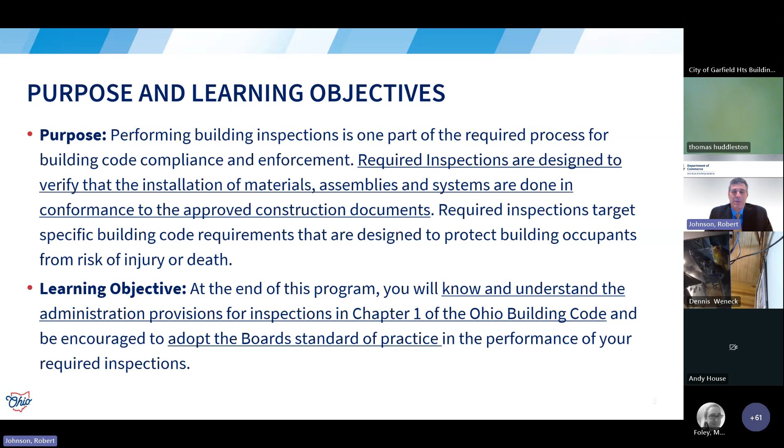So, as a quick introduction, we talked about this yesterday, but it is worth repeating. What we want to do is understand building code enforcement concepts and what it is. The intent or the purpose of the code, as established in OBC Chapter 1, is to establish uniform minimum requirements related to the conservation of energy and safety and sanitation of buildings for their intended use and occupancy, with consideration for performance, meaning establishing requirements in terms of performance objectives of things that are designed into buildings, to the extent of use, meaning the use of materials, technical methods, devices, etc.

And the building code really does strive to recognize that cost does have an effect on safety at times. So the International Code Council and all the development that they do of the codes has really got that always in mind. Of course, the main objective is to ensure safety of occupants in buildings. No matter how big, how complex they may be, they need to be safe for an occupant to be able to exit buildings, to be safe in buildings, to be able to operate in buildings safely.

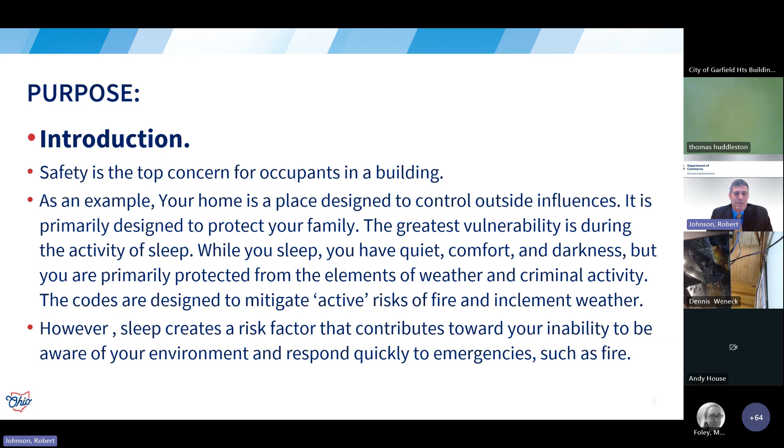The codes are designed, though, to mitigate these active risks of fire and inclement weather. So even though sleep creates a risk factor, we want to make sure that the buildings that we're in, especially our homes, are designed in such a way as to mitigate the greatest risk, and that is fire. If we do not have things built into our residential structures, we could suffer as a result of something that didn't go right with the system in the house or an electrical fire or things like that. So as you can see, safety is always our top concern. Whenever we go from the outside to the inside of the structure, risks increase. So let's move on from that and let's talk about some of the strategic objectives of the board and the things that we promote.

Of course, building codes mitigate risks and hazards of all types, and even for people and how they gather in buildings. We promote consistent and uniform code enforcement in the state of Ohio, and that's really one of my primary objectives in my position with the board, is to establish uniformity and consistency of building code enforcement through the state.

So that if I go to get an approval from, let's say, East Cleveland, and then I go to Cincinnati, and I go to Central Ohio, Columbus, I should be experiencing a consistently similar process to attain building code compliance with the design that I've submitted.

Of course, everyone's different, personalities are different, structures and buildings that these building departments reside in, their capacity to handle various levels of projects, all those things factor into how constituents experience how building code enforcement is done.

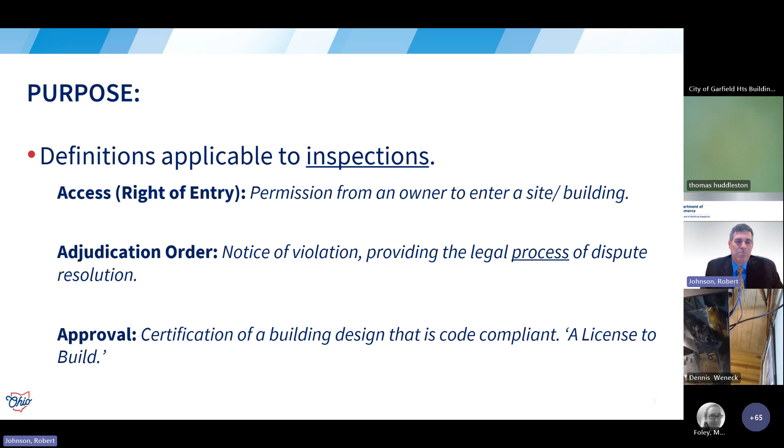An approval is a certification of a building design that is code compliant. And the Ohio Revised Code, of course, calls it a license to build. Some other definitions. Compliance: it's a design and construction that comply with the Ohio Revised Code sections that regulate or give the board authority to regulate the building codes.

An inspection is a verification that construction matches the approved construction documents. Violation is a notification that the construction does not match the standard of the approved construction documents. So as you can see, this language is designed to ensure clarity when we're doing enforcement.

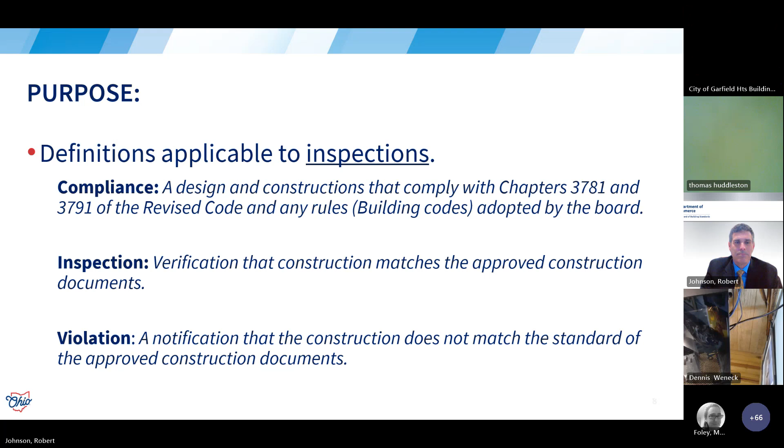Okay, so again, this is reiterated from yesterday, but the scoping of the building code is such that structures are to be determined to comply with the building code. In other words, to become safe. So no plan shall be approved or inspection approval given unless the building represented by those plans would, if constructed according to those plans, comply with the Ohio Revised Code and the rules of the board, which is the actual building code. An owner may exceed the requirements of the Ohio Building Code.

So what that means is that if, let's say you want to build a house and you want to take the extra step to really provide a higher degree of protection for you and your family, so you ask the builder to put in a fire protection system, sprinkler system. There's no problem doing that. You're actually exceeding the requirements of the Residential Code of Ohio by incorporating that system into the design.

However, it still has to be submitted with the design. It still has to be determined to be in compliance with the code, and it has to be installed in compliance with the approved construction documents. Even though it's not required as a system in this type of building, it is still required to be approved and inspected, and that is part of the certificate of occupancy.

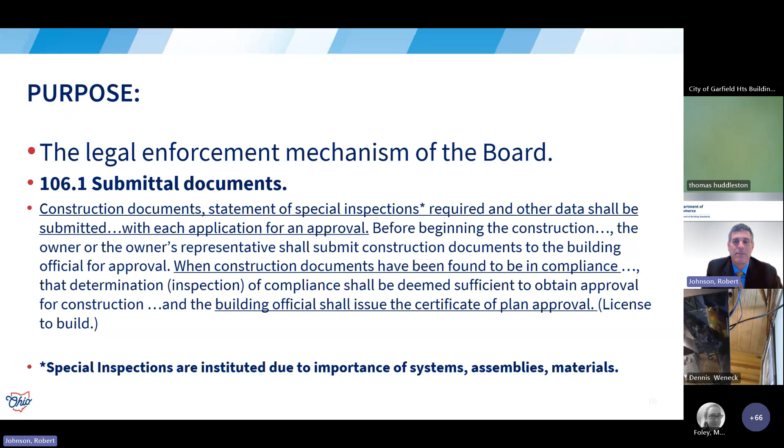One point about the special inspections is that it is instituted due to the importance of the systems, assemblies, and materials being used. So when you look in Chapter 17, you see the types of things that are required as a special inspection. Then you begin to understand that that's more than just scoping of the project. It's about the importance level of the types of things that are being inspected in Chapter 17. Alternative engineered design.

Just a heads up, in the near future, we're going to issue a memo, a BBS memo, on alternative engineered design. It appears to be something that is not clearly understood out in the general public. And we just wanted to clarify what it actually is, what it covers, how it's used, how it's enforced, how it's determined to comply. So when we look at 106.5, it's called alternative engineered design.

So the design documentation, including the inspection and testing of an approved alternative engineered design, shall comply with the requirements in 106. So design criteria, meaning it's design that shall conform to the intent of the building code and shall provide an equivalent level of quality, strength, effectiveness, fire resistance, durability, and safety. Materials, equipment, or components shall be designed and installed in accordance with the manufacturer's installation instructions.

So just so we all understand, when products are put into buildings, that includes materials, and it also affects methods of construction, the majority of these things have already been vetted. They've already been tested. They've already been approved. They have reports associated with them from conformity assessment bodies.

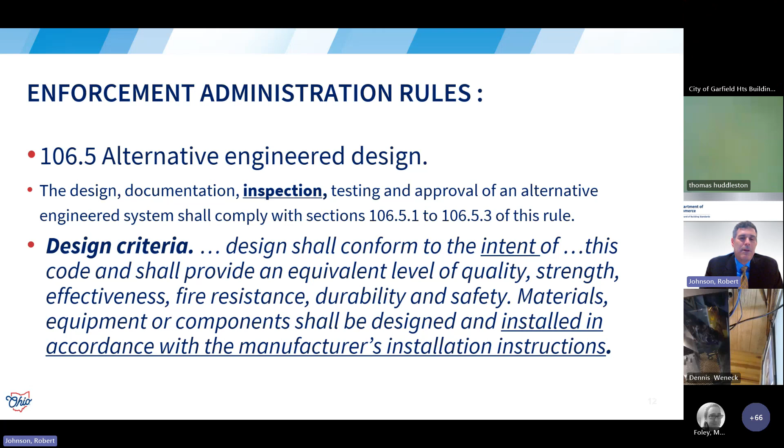And the engineer has to basically prove to the building official that this new thing is meeting the intent of the building code, and they've been able to do to the best of their ability, and perhaps even with help from testing laboratories and things like that, to establish that what they've designed is approvable and can be integrated into a building. So a good example of this is actually a very old example.

Between 1936 and 1943, the great Frank Lloyd Wright, perhaps considered America's architect, had performed an alternative engineered design on a building that was amazing. And it's still there and it's still amazing. What he did was create an alternative engineered design. And this design uniquely is addressing structural systems. He had a couple of engineers that always thought outside of the box, and that's why Frank Lloyd Wright's buildings are extraordinary. But I think the main thing here we want to consider is how they went about doing it.

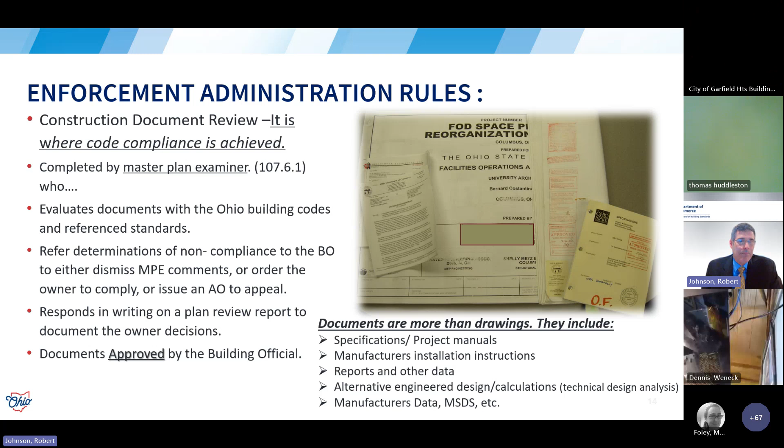There also is a certificate of plan approval. This is part of that packet. This certificate essentially establishes the criteria that the building design represents and any other outside information such as variances and stipulations, certain conditions of the approval. Also remember that a list of required inspections, if required, for the project would be included in this package. And the building official is going to give an on-site inspection record to the owner with the certificate of plan approval.

I just want to caution you as inspectors, when you're called to come out to do an inspection at a site, you need to make sure that this information is on the site. If any of these things is missing, you should tell the owner or tell the contractor that this information is required and that you cannot perform the inspection until you have that information.

Now, if your building department has iPads and things like that that you use as part of your service, a lot of departments now are preloading the construction documents for the projects so that when you show up to the site, you already have them on the iPad and you can refer to them as you do the inspection. And that's becoming more of a thing now that we've entered the digital age and more things are being submitted to the building department electronically. There may not be physical drawings anymore with regards to doing your job. So just a heads up on that. If you're not tech savvy, you want to keep working on that.

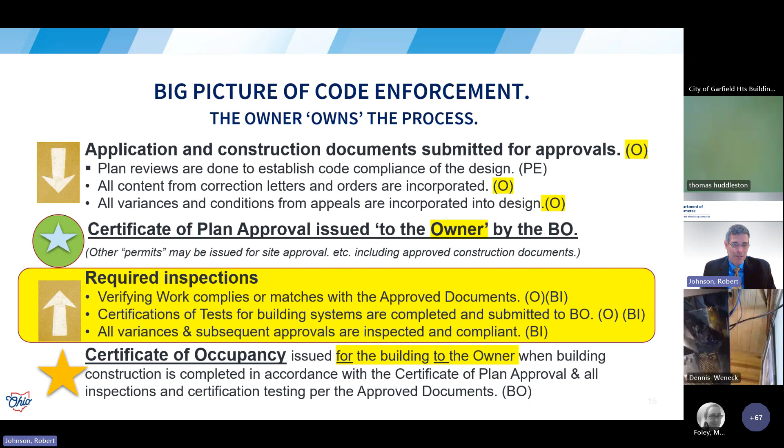And just one other dynamic is that you can have multiple inspectors doing inspections and re-inspections, and we'll talk a little bit more about that interchange later. Okay, so let's talk a little bit about personnel responsibilities. We did talk about these things yesterday. I'm going to just kind of fly over this information, but we're going to focus on a couple other things with regards to liability and also violation of duties.

Okay, so as we said yesterday, this section has now essentially been vacated out of Chapter 1 of the 2024 Ohio Building Code, and all this information now has gone into the Ohio Administrative Code as basically duties and responsibilities. So an inspector is responsible for determining that work is performed in compliance with the approved documents. You're going to hear me say this all day, okay? It is your job to verify that work matches those documents. And remember, we're talking about the approved documents.

When you're out on the job site, there's going to be a bunch of copies of the documents. They may not be the approved documents. They could be construction drawings that the contractor has specifically for the scope of his work. He may have a bid set out there. He could have a permitted set that hasn't been stamped and approved by the building department. It's just a copy from the designer.

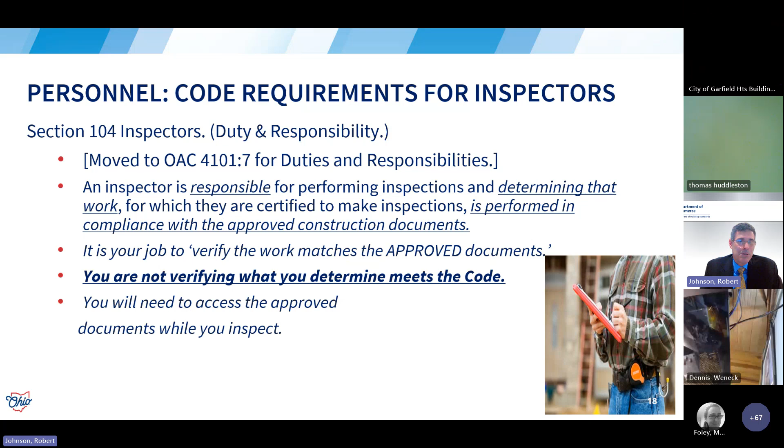You want to make sure that you're always working from the approved set, the one version that the building official has stamped and approved. That is the one that we're enforcing. You are not also verifying what you determine meets the code. You are looking at the documents and you are checking for that exactness between the construction and the documents. And you will need to access the approved documents while you inspect.

Also, all inspectors shall inspect the work to the extent of the approval for which the inspection was requested. So if you're out there for a framing inspection, then you're going to do just the extent of that inspection. You're not going to go back and look at the foundation or other things that have already been inspected and approved, meaning verified to comply with the approved building documents.

So like I said, with phased approvals, it does get a little tricky. You need to know the extent of the scope of the type of approval that it is. It could be a nonconformance approval, which, sorry about that, I should have struck that. We no longer have a nonconformance approval in Chapter 1. We just have conditional, phased, and annual. So the ones that remain, they do have limitations.

Conditional: the contractor may have a conditional approval and he started work on the footings and foundations and the undergrounds, but he can't proceed past that until he's already submitted, meaning the designer submitted the balance of the construction documents for review and approval. If they are phased approvals, you're just going to do that phase.

If you're out there to do inspections of, let's say, the start of it, the footings, foundations, the slab on grade floor, any undergrounds, including building system equipment. It could be underground ductwork, things of that nature. Those are the things you're going to be looking at.

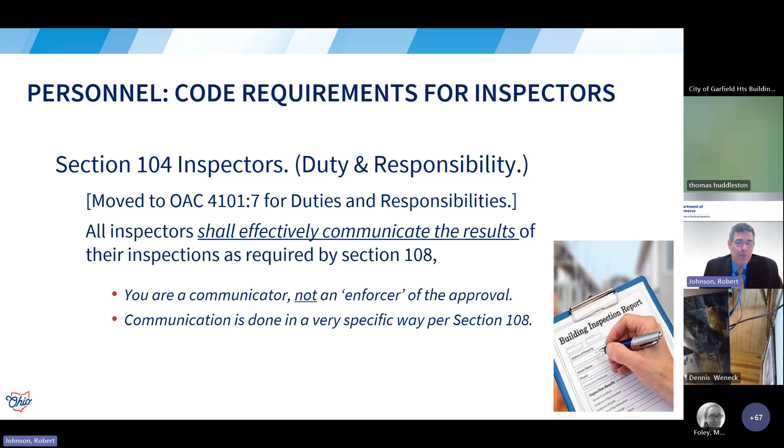Duties and responsibilities have also been moved over to 4101:7. And the key here, though, is that it says in there that all inspectors shall effectively communicate the results of their inspections. Remember, you are a communicator. You're not an enforcer in the strictest sense of the approval. That's actually the building official. Communication is done in a very specific way per section 108. So when we get there, we'll talk about those specifics.

We also talked about this yesterday, that inspectors are to conduct themselves in a professional, courteous, impartial, responsive, and cooperative manner. Remember, you're not just representing yourself, you're representing your political subdivision. You're also, in a way, representing the Board of Building Standards in the state of Ohio. Conduct means to cause oneself to act or behave in a controlled manner. Okay? That's conduct. And then have a reputation of good character and perform your duty being above reproach. Okay?

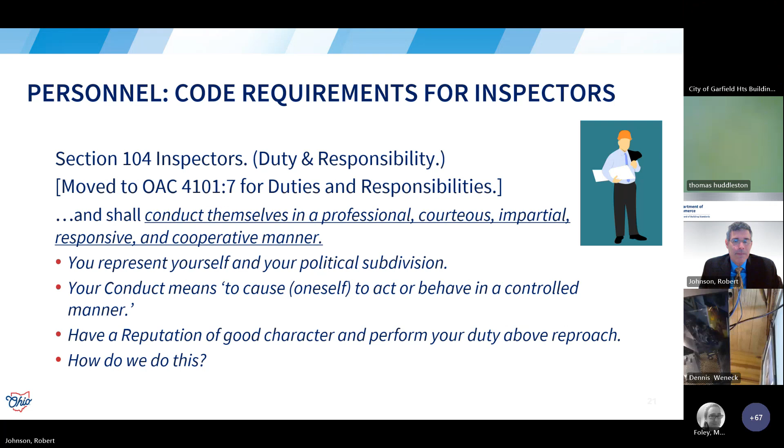You want to make sure that you're doing things the right way. And you want to make sure that no one could ever say anything against you because of how you have been performing your duty. So, how do we do this? Well, I think it goes back to this issue of conducting ourselves in a certain way. So I'm going to define it a little bit more. Your duty, no matter your assigned responsibility in your certified position, is to conduct yourself in a manner that is, and the first word is professional. Professional means to be businesslike, competent, knowledgeable. That's what a professional is.

Courteous means to be very polite, respectful, and deferring. Deferring is a hard one because we want to just kind of take charge of things, but we also want to respect and really defer the conversation to the people we're talking with so that they can be heard. That's courtesy, being polite and doing that. Impartial means to not be biased, and it means to be fair and equal in your treatment of either people or even construction.

But the key here is that when we have a bias about something, let's say we've done something as a contractor before we entered this business of enforcement, that we've always done it this way when we constructed this or that on a project. And then we come along as an inspector and we see that this contractor is doing it a different way. And we feel like we need to tell them that the way they're doing it is the wrong way, when it may not be the wrong way. The end result may still be the same. So that's why we want to be careful to not be biased in our approach.

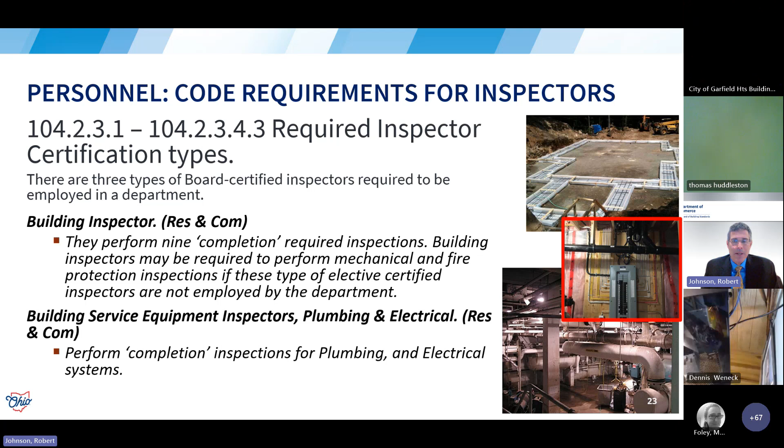But we do want you to know that if you are an electrical inspector or a plumbing inspector and you have no other types of certifications, you should not be dispatched or asked to do other certified inspector duties and responsibilities. Okay, so let's all stay in our lane based on our certifications.

Okay, there are two other classes. There's elective inspectors, and these are ones that are basically kind of outside our purview. Medical gas is board certified inspectors that may be employed by the department, but they have a certification through the state of Ohio. Other inspectors on a project not certified by the board may be involved as part of the project inspection team. So these other inspectors are not your team, but they are still on the team for the building.

So if you have boilers, elevators, or if you're having special inspections done, DIC, the Division of Industrial Compliance, does the elevators and the boilers. Special inspections could come from the design professional of record on the project, or they could be people who come from a business that is a recognized conformity assessment body with the board.

Coordination is key. All inspectors are required to coordinate their efforts with other inspections to verify that the work is completed. This should be obvious, but inspections must be completed in order. So we expect, of course, the footings and foundations to be done first. And when it's approved, then you can build upon it with framing. And while the framing is being done, they can also start building the electrical and the plumbing systems into the framing.

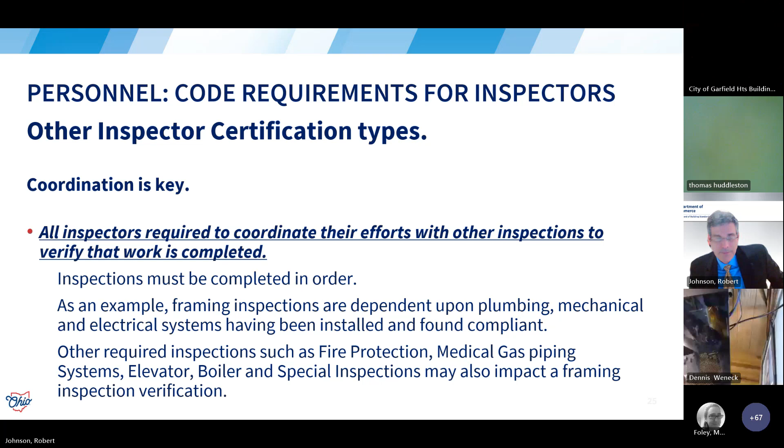Okay, let's talk about liability. First off, I got to tell you, the only reason why I'm bringing this up is because it's mentioned in the code, but we are not lawyers. We are not your prosecutor or your law director. But we do want to provide a little bit of understanding on this topic. If you have specific questions with regards to liability, you have to talk to the folks at the jurisdiction that you work at.

Okay. So let's talk about it though in terms of describing this issue from the standpoint of the Ohio Revised Code, because this is really where this originates. Liability of certified building department personnel for any tortious act will be determined by Ohio courts according to the applicable provisions in the Ohio Revised Code. So a couple words in there we need to define. Liability means being made responsible to pay for offenses to someone harmed. And then tort is an action that wrongly causes harm to someone, but that is not a crime and that is dealt with in a civil court. Okay.

Liability of certified building department personnel. To be protected, it says the employee's action or failure to act that gave rise to the cause of action under the tort law had to be within the discretion of the employee with respect to policymaking, planning, or enforcement powers before the protection of the statute can be invoked, unless one of the following exists.

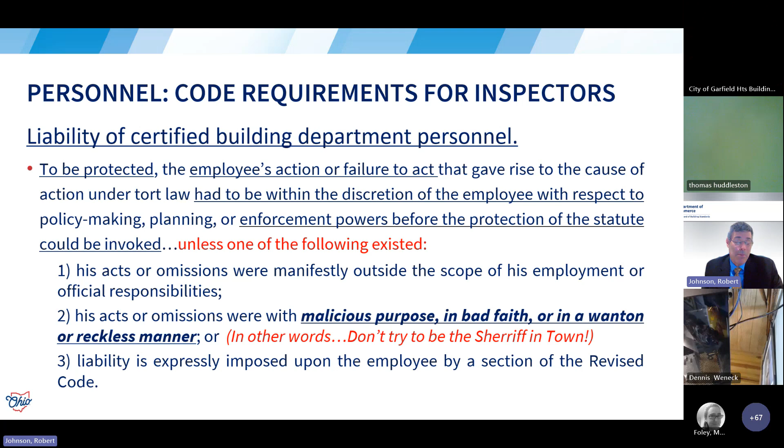I mean, you're covered, but what it's going to mean is this. If the employee is sued, the political subdivision has a responsibility to defend you if you prevail in the action. If the employee acts within the scope of his or her job duties, the employee has the protection and is unlikely to be successfully sued. So the liability coverage doesn't mean you won't be sued, okay? It just means that if you prevail in the case, the subdivision will basically pay for all your expenses. Okay? If you lose, guess who pays? I think you know the answer.

Remember this, the board or their staff do not provide legal advice on these matters. Okay, I'm just telling you that the code mentions liability. How it's executed at the local level, you need to talk to them about it. It's highly recommended that you contact the political subdivision's legal counsel, such as the law director or prosecutor, for guidance with these issues. Okay, next one.

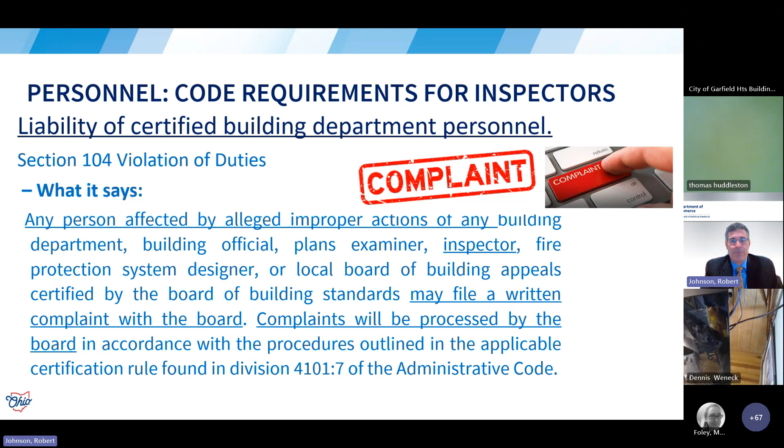So, but when we get complaints, we take them seriously, and we always wind up calling the building official to get additional information. We know there's two sides of the story. We get that. We don't take sides. We try to remain as unbiased as possible when we hear complaints from constituents. We are advocates for you, but we're also advocates for the constituents in Ohio. They should be being served well. So I just wanted to mention that violation of duties is an issue. All right, so let's move on to the next thing.

These are the types of complaints that we generally receive. Sometimes there's gross negligence in the performance of the duties of the inspector. Sometimes there's incompetence. Maybe they just don't understand. They've been assigned to do a certain type of inspection and they've never done it before. Incompetence doesn't necessarily mean that they're stupid. It just means that they're not informed enough or they haven't learned enough about a particular area about buildings. And yet their certification requires them to do those inspections.

My recommendation is you should always have a learning mind. If you show up at a job site, inspector, and you're confronted with something you've never seen before, call your buddy who has been doing this for 30 years and ask them about it. Say, hey, help me understand what's going on here. I'm looking at the construction documents. It looks like it's correct, but when they performed the test, this happened. So always be learning. And if you have questions about something after you perform an inspection, at the end of the day, go back and look at the code book and learn a little bit more about it.

Okay. But here's again, if someone is doing things in an incompetent way, that's a legitimate reason to hear the complaint. We just need to find out what's going on. And also misconduct in the performance of duties. Let's say you got your way of doing things, and that way isn't really matching up with what the board's way is. We'll find out about it eventually.

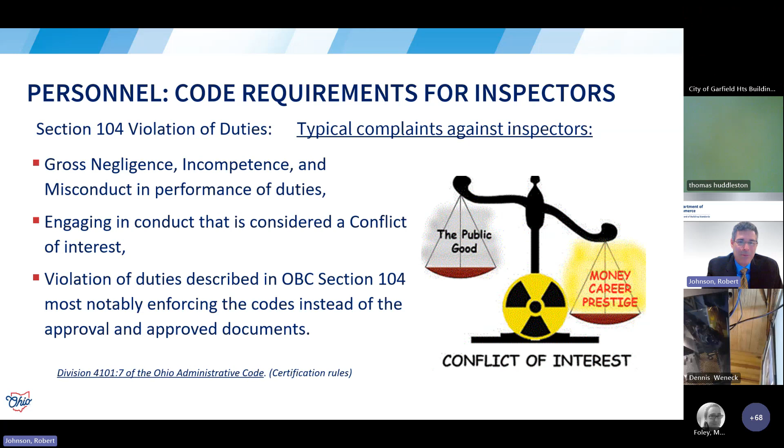So what it means, you are accountable to many entities regarding your duties and responsibilities, not just to the board, but to the building official who's the one responsible for administrating the whole building department. Also to your elected officials, because they're the ones who own the certification of the building department. It's not the building official, it's the elected officials. However, if violations to the board's rules occur, you could be disciplined or decertified or suspended or maybe put on probationary status if what the complaint said was true. That's when we work with the certified individual to correct things that they're doing incorrectly.

All right, now let's talk about the inspection program.

See how we doing? Okay, 9:30.

All right, so we're going to talk about the process of inspections. So after those documents are approved, construction or work may proceed.

Now that's in accordance with the Ohio Revised Code. So we talked about the difference between approvals and permits yesterday. Permits are local instruments for perhaps all types of approvals for a building and its site. So we understand that. The certificate of plan approval basically has one specific purpose, and that is to say that this design complies with the building code. Therefore, if you choose to build it, it will be a safe building.

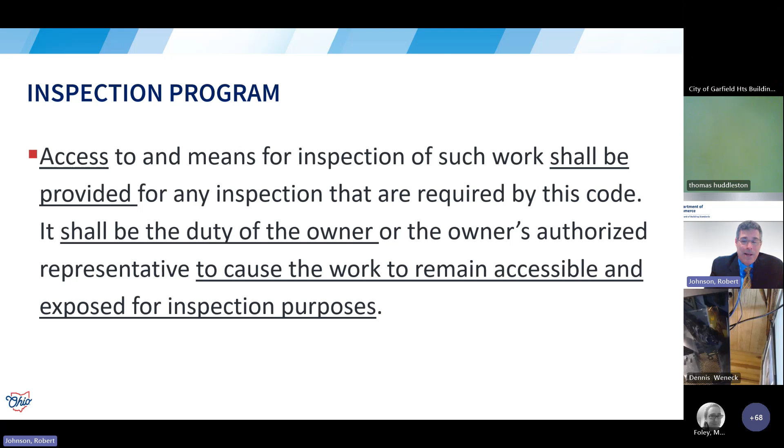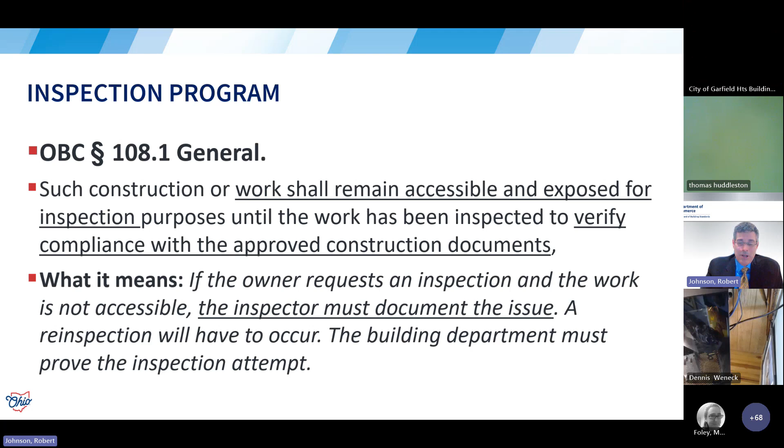All right. Work shall remain accessible and exposed to verify compliance. What it means is that the inspector must document the issue. If they can't get to the work, you still have a responsibility to document that in the inspection record, and you can indicate that work could not be completed and that reinspection would need to be called for once those materials have been moved away from the construction. You do have that right to do that.

Okay, this is with regards to how long after someone calls for an inspection does the inspection have to occur. The section says that within 4 days of when it's called. So remember, the contractors are on a deadline. Contractors are pushing the work, and they will most likely document when they called you, meaning the building department. If they know this section of the code, they know that if you don't show up in 4 days to the minute, they will start working on the next phase because they have the right to do that.

This is why we have to be prompt. We need to be on time. We need to be within the limitation of when to do the inspection. You may be slammed right now and are having trouble getting all the inspections in. It's up to the building official to ensure that everything is getting covered and that everything is being reviewed in terms of the projects. He or she is responsible to track and audit all the projects in the queue. Okay. So the bottom line is that the department is required to manage timely inspections.

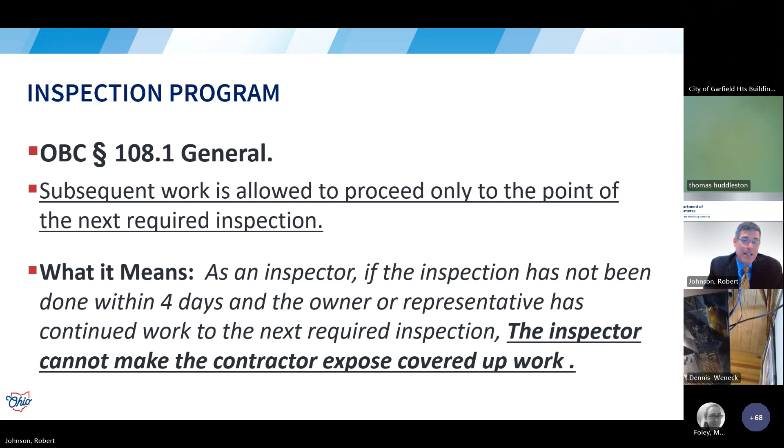Subsequent work is allowed to proceed only to the point of the next required inspection if you've gone beyond 4 days. So in other words, if the contractor covers up the wall and the electrical, plumbing, and framing hasn't been inspected, but they were all called for and no one showed up, the contractor does not have to take down the drywall. I don't know how you're going to do it. You can look from underneath if there's a basement. You can look from above. You can look at angles, but you can't tell them to take off the drywall.

Required inspections. Okay, so we talked about the importance of having an accurate listing of required inspections on every given project based on the scope of the project and perhaps even the phases if there are phases. Generally speaking, we say that a boilerplate inspection list isn't acceptable only because they usually just get reused. And maybe a third of those inspections won't be applicable to the project that is to be inspected. So we want to make sure that a list of all required inspections for each project is accurate. Okay.

The building official shall cause inspections to be set forth in the inspection list by the appropriately certified inspector in accordance with the approved documents. So we talked about this earlier. If you are just an electrical inspector, and I'm not saying just, because you know a lot, but electrical inspectors, if for some reason a building official or a clerk assigns you to do something that you are not certified to do, just go back and tell them you can't do it because of the certification.

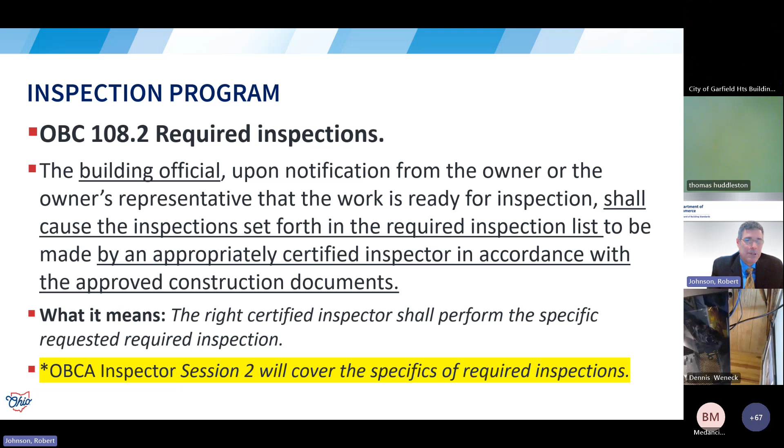Okay, we want to make sure that everyone is properly assigned based on their expertise to do the inspections they're supposed to do. Okay. Session 2 will talk about the specifics of required inspections. So right of entry, this one is really quite simple.

Basically, we're trying to, again, strike the line on the difference between lawful entry into a building or a premises versus trespassing. If you're trespassing, usually the police are involved and people are really upset. So let's just make sure that we know where the line is. The building official or their designee, the inspector, is authorized to enter the structure. Okay, so you're already authorized to do so. Building code says that this is your responsibility to enter those structures, but you're supposed to do it at reasonable times.

And I would also add to that, or within the policy of the building department. You may have a policy that your inspections start at 7 a.m. and you're trying to accommodate contractors because they like to get these things done in the morning so they can have a full day of work ahead of them. Or it could be the individual homeowner that starts work really early and isn't home till 5 o'clock, but he will be happy to have you come at 6 o'clock to do the inspection. So whatever your policy is, that's what you want to adhere to.

But here's the thing, when you show up, you need to show your credentials, meaning who you represent, the building department, the jurisdiction, and that you ask to come in, as in, may I come into the structure to perform an inspection? Be that disciplined about it. You're telling them what you want to do, and that you want to go in and look at the work. And then make sure that they say yes, and that's the easy answer. Yes, you may come in. You want to hear that because it'll be your word against theirs if there's any disagreement about it later.

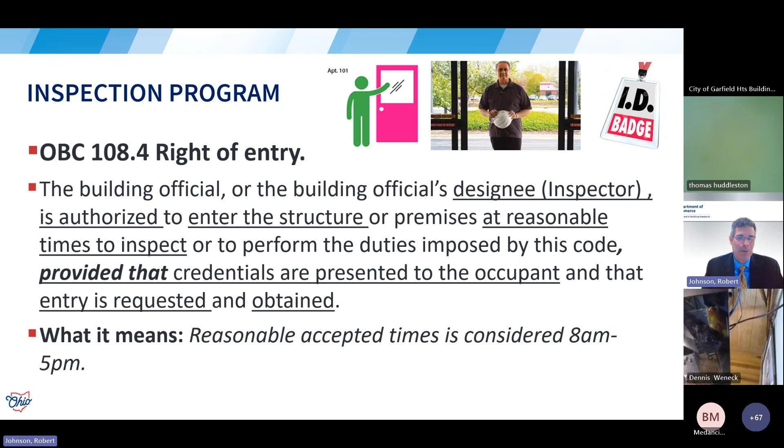Okay. Right of entry, under normal circumstances with inspections, is usually not an issue. It could be as simple as just going to the job trailer and saying, "Hey, I'm here. Let's take a look at the documents and talk about what we're going to look at today before we go walk the job." You already have been given right of entry to enter the site, and you've already been acknowledged by the site superintendent. So there's not really a formality per se of right of entry on a job site.

But when it's an occupied building already, that's different. You need to make sure you're checking in at the front desk or checking in with the owner at the door of the house or at the apartment. So anyway, all that to say is I think you get it. Let's just make sure that we're always doing the right thing.

Okay, so there's times though where someone reports a serious hazard. So where permission to enter has been denied, someone doesn't want you to come in to see something, or the building official has probable cause to believe that there exists in that structure a serious hazard, it says that the building official can proceed under Section 109 for remedies or recourse provided by law to secure entry, meaning an administrative search warrant from the prosecutor or the law director.

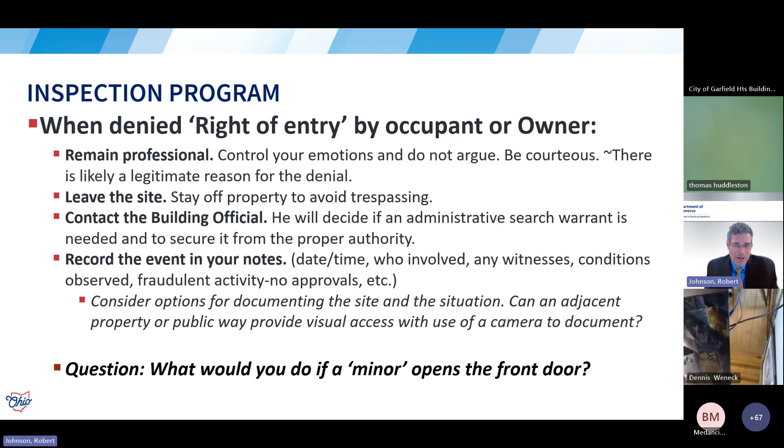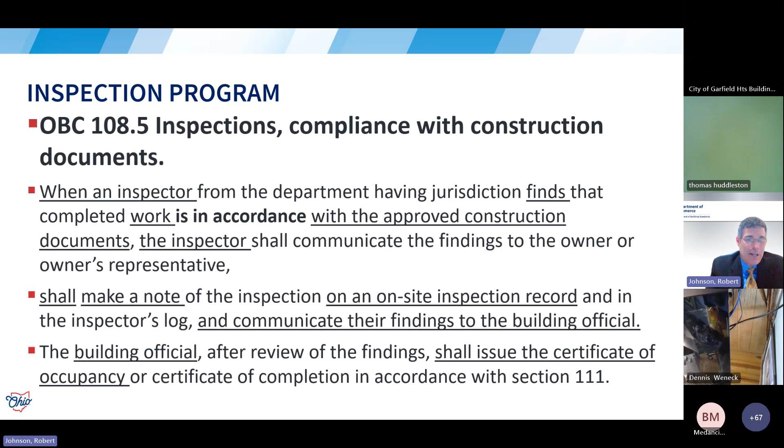So when an inspector finds that work is in accordance with the approved documents, they need to make a note on the on-site inspection record and communicate the findings to the building official. And once all the work's done from all those inspections, the CO is issued. So when an inspector finds work that is contrary to the approved documents, the inspector is to proceed to section 108.6.1 or 108.7. So let's talk about that.

108.6.1 basically says that you're communicating the nature of the differences to the owner or their on-site representative. All right, meaning that the work doesn't comply in this way. And now the owner has three options to decide what to do. They can change the work in the field to make it match the documents. They can change the documents to get a reapproval for the difference in what's been built and what is in the drawings. Or the owner can just do neither.

So when it's neither, option three, then it becomes option four. You're communicating to the building official, and oftentimes the building official will then issue an adjudication order requiring the owner to either fix the work in the field or change the documents, or they can appeal it to a board of building appeals.

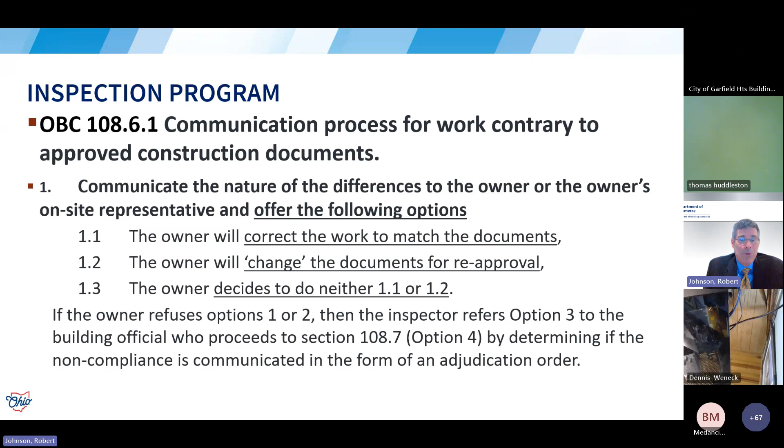So this information is communicated on the on-site inspection record, okay? Remember, this is two-way communication. You've done your inspection, you're writing things down. The contractor may have walked the job with you, already knows what has been found, and they're talking to you the whole way, right? Oh, we'll take care of that. Well, we'll have you come back tomorrow morning. Is this okay if we just leave it this way? You're going to hear lots of different propositions to you about how to get that inspection to pass.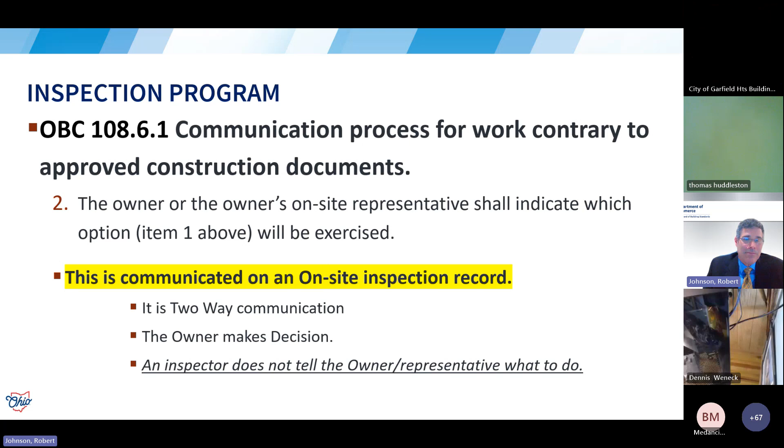So we don't want to tell the owner or the representative what to do. We just have to revert back and say, look, you have options. Just make a decision and we'll roll with it. And you're going to document that decision on the on-site inspection record. So here's our example of that language in a form that we have in the building department resource packet.

Anytime I go to a building department, I'll see an inspector will scribble his initials on it. And I can't tell who it is. Okay. The only way to figure it out is to ask the clerk to look it up on the database and to tell me who the actual inspector was that did it. It's good to put your name down kind of in a neat way, at least so people know who was there. And then you, as the inspector, you're going to write down the things you observed that were not in compliance.

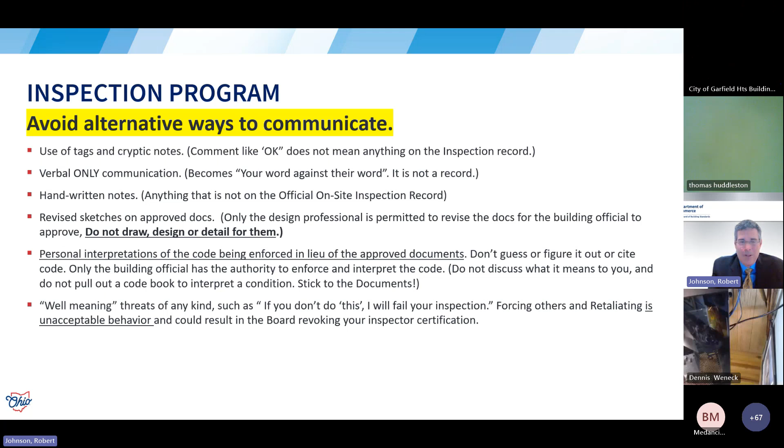We already covered this in that last slide. That's just a couple other little comments. When you're doing your inspection record, we don't want to just write in okay or pass in there. We want to indicate that it complies or does not comply. We got to stick to that language because that's what the building code says. And then the other things we already talked about. So let's keep moving.

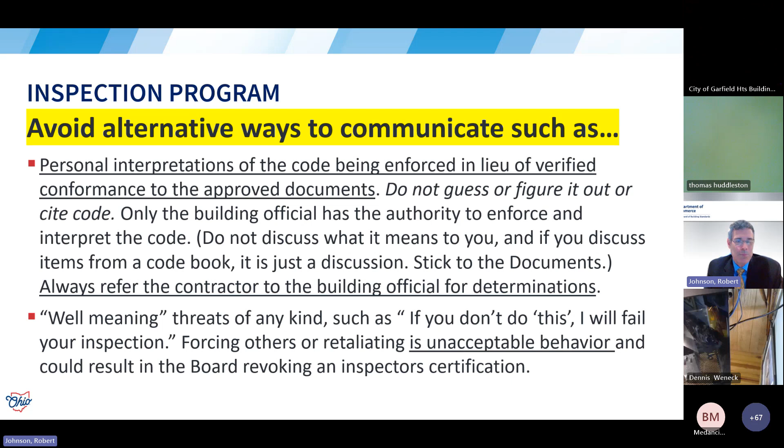All right, avoid alternative ways. Again, your personal interpretations. We don't want to do that. We can talk about the code. We can talk about the possibilities with them, but it's up to them to execute it. We are not going to stand there and say, well, that sounds reasonable. I think I can accept that. Okay, we can't do that. That is the building official's responsibility. Okay, he makes those determinations.

And then communication for work contrary to the approved construction documents. Okay, so this is when we know it hasn't passed, doesn't comply, it doesn't match. So if the owner or their on-site representative indicates that they're not going to bring it into compliance and that they're not going to revise the construction documents, you as the inspector need to document this, okay? And the reason why is because this issue may go to appeal, and your building official will have to attend that hearing, and he needs to know everything about this condition.

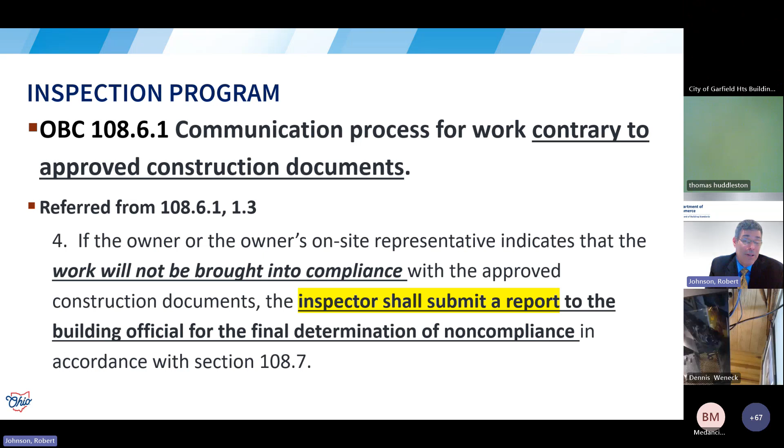So this report needs to be descriptive. It is a record. And the building official uses this report to communicate this information to the owner in an adjudication order. Then the owner can choose to appeal it. And then this report information will be the information and probably the pictures. I always recommend in these type of situations that you take the pictures so that the building official understands the whole thing. And he uses this when the owner makes that request for the hearing. So again, building official is the one that makes these determinations. We are documenting the conditions, okay?

So in the chat here, appeals occur, generally speaking, every 2 weeks. If your jurisdiction goes to a local board of building appeals, and there's 7 of them basically in Ohio, and most of them are in the big cities. So you got Columbus, you have Cincinnati, Cleveland, and you have others peppered in the state, as well as departments that have contracted with them to have hearings done through those local boards of appeals.

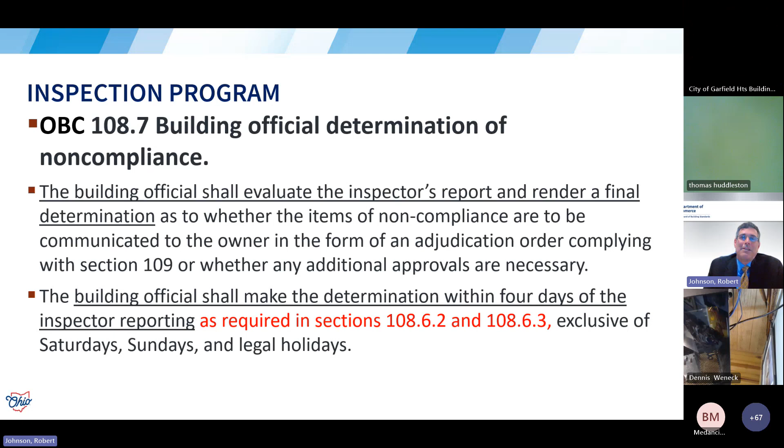There was one question about while performing an inspection, such as an electrical final, for example, should the inspector check every device or just a handful throughout the structure? Great question. So yesterday, and we'll talk about this a little bit today, you'll notice that in section 108, there's really only one instance where a final inspection is mentioned. Technically, there are no final inspections. Technically, what we have is inspections and re-inspections.

So if in the course of doing electrical inspections, whether it's by phase or by progress of the work, if, and okay, let me back up for a second. A lot of you use some terminology that isn't in the code. You say things like, we do rough inspections and we do final inspections, and then we'll do completions, or sometimes what's called an occupancy inspection.

Okay. Basically, none of those three things exist in the building code. Okay. So the way the code is written is that when work is ready for inspection, the inspection takes place. If it is in compliance with the documents, the inspection is completed. There is no need for a reinspection or for a final inspection.

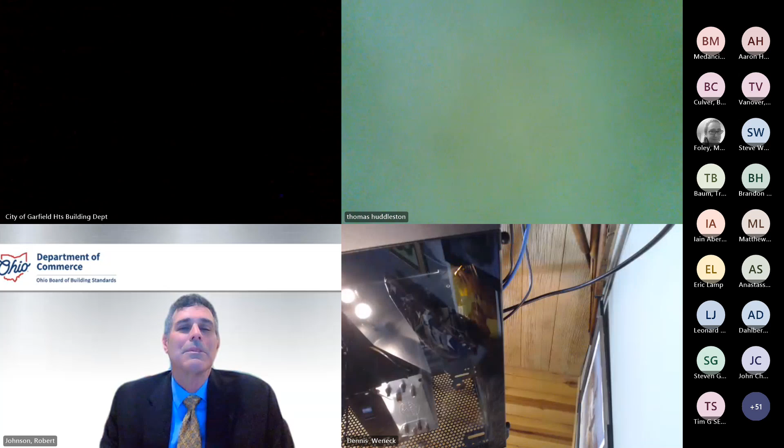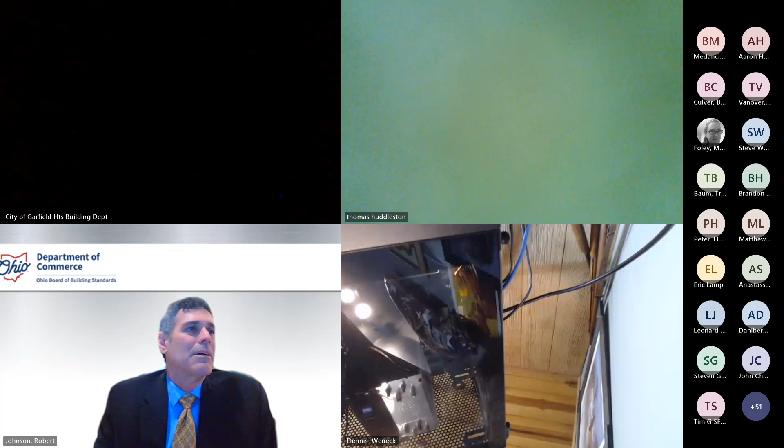Okay, so, seem to be frozen up. Here we go. Okay, so let's see here. I have a feeling I'm not projecting this presentation. Your presentation is not up yet. Okay. All right. Is it now? You've got it now. Okay.

Okay. So now we're going to get into the nitty gritty of required inspections. So we'll refer to these things as we go through this first part, and there'll actually be a couple other sections following it. Okay.

Anyway, as you continue as a building department to change, I know that the pandemic really pushed us into doing more things electronically. It hasn't necessarily changed the fact that people are still required to drive the technology. So your presence out on the site, I'm sure, is meaningful because if we did everything with drones, that would be a totally different type of situation. But they do come in handy with skyscrapers and very large roofs.

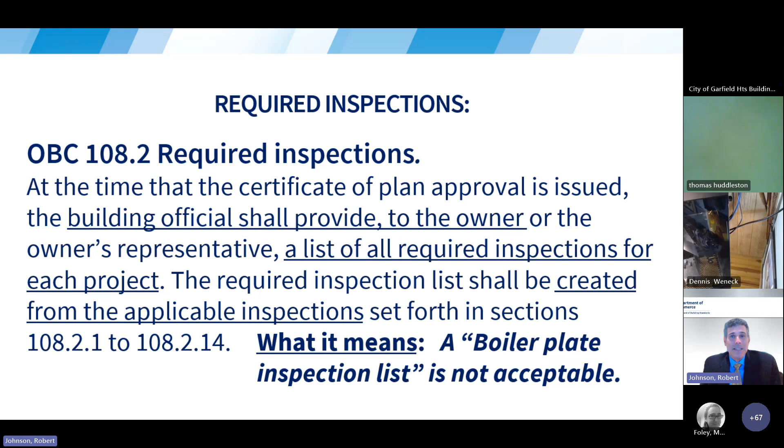So when the CPA is issued, we know that the building official provides the documents, the required inspection checklist, and the on-site inspection record. Okay, we've talked about that. We also talked about that the building official, upon notification of the owner that the work is ready for inspection, shall cause the inspections to be done. So what it means is that, again, the right certified inspector has to perform the requested type of inspection.

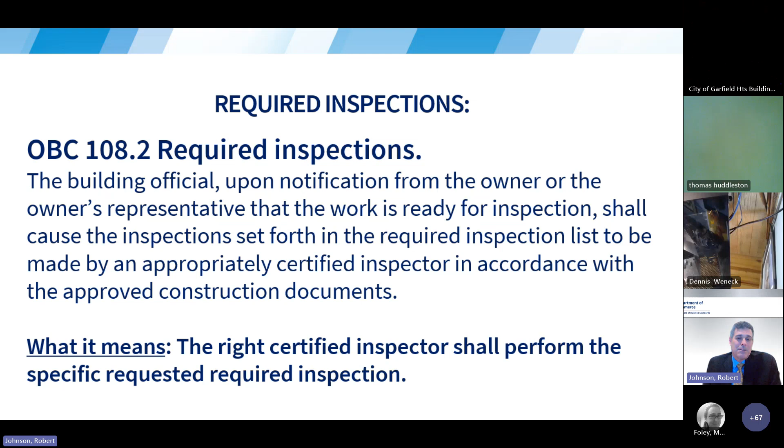So these are some of the things that we already know, but things that we need to be aware of procedurally as we're performing our duties as inspectors. Okay. So where do we start? You've been dispatched, you've been out to the job site, you're there, and you have gotten right of entry or you've checked in with the superintendent at the job trailer. And now as you're doing your inspection, you need to check for a few things. First off, you want to check for the posting of the CPA.

That's the public acknowledgement that this is an approved site and an approved building that's being constructed. So if there isn't one that's, say, on a building, but work's being done on a building, the inspector may pause and stop by and say, hey, I was just checking to see, do you guys have a permit or an approval to do this work? And that's how you catch the people who are basically committing fraud.

The ones that we know aren't the issue are the new construction sites, generally speaking. They're usually doing everything by the book. So brand new office buildings, brand new hospitals, brand new houses, generally speaking, the CPA is posted on the site. But you want to make sure and look for that, okay? What happens if it's not there? Do you perform the inspection?

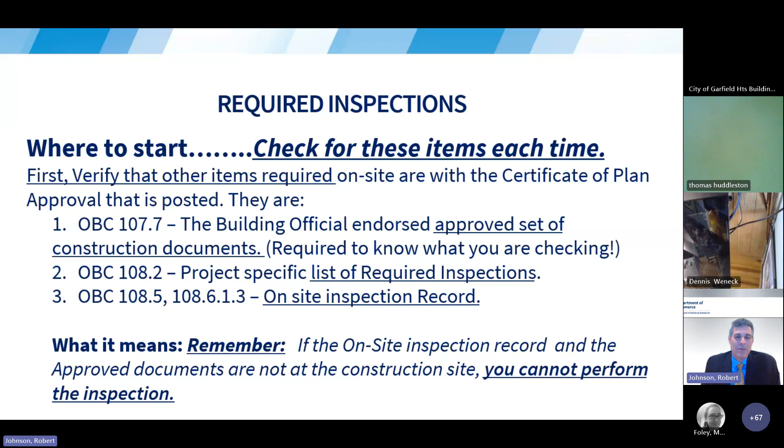Okay, so essential inspections for verification for safe buildings and their systems. So these are the required inspections in 108. These are intended to be the ones that would apply to every building, okay? So when you show up for that first inspection, you're going to be checking for lot line indications. And these have to be in before any work has been started. A lot of builders won't do that. They'll just mark it out and they'll start digging and start calling for inspections.

You want to make sure that that building is going to be where it's supposed to be per the site plan that's been approved, because it can affect a lot of things. If they built too close to another building, now we got a problem. So we're going to be checking for those things, and we're looking for those lot boundaries, those encroachments that have dictated where the building is to be placed, okay?

And you need to look at the CPA, because if there were variances granted, you would want to know that, because you may be looking at the site plan and saying, how can they be 5 foot away from the property line? That doesn't make any sense. Shouldn't they have a rated wall there? Right? So then you look at the CPA and it says under conditions, variances, stipulations, that a variance was granted, and that's why that part of the building is the way it is and where it's located on the site.

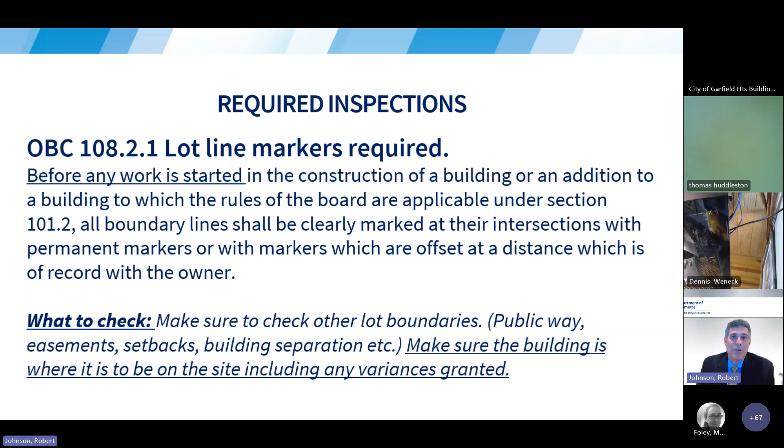Okay, footings and foundation inspections. So these are done after excavations for the footings are done, and basically the pieces that get buried in the concrete are in place or covered up, such as vapor barriers under slabs. So anyway, it's required that the forms are in place if they are poured concrete foundations, and materials for the foundations shall be on the job, except where concrete is ready mixed. Okay, so the concrete need not be on the job, but you need to be able to verify what they have.

So what are some things that we're going to be checking for this inspection? We need to verify from a soil report that the soil bearing capacity is correct, that they're building it in accordance with those requirements. Let's say that they dug out the entire foundation and they started putting everything in, and the contractor did a bunch of backfill in one corner of the building. You would want to find out why they did that.

Most likely it was soil that was bad, and you want to make sure that based on the soil engineer's report, the contractor followed the recommendations for when soil that is bad or has been disturbed, how that is to be treated, how it is to be replaced, or how it is to be compacted. So we want to make sure that those things have been checked.

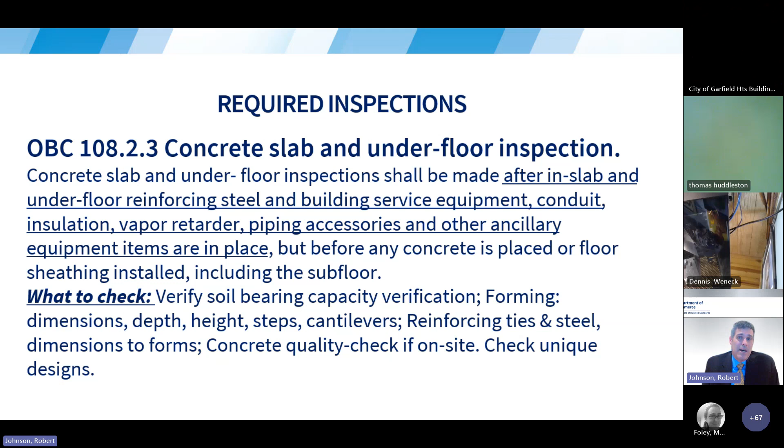Again, it's similar to the footings in the foundation work. You want to verify soil bearing capacity, that verification's been done, and that any corrective measures that have been done have been verified against the construction documents, and that you've looked at the condition. And again, you're looking at more of those on-site checks based on the approved construction documents.

Lowest floor elevation. So this primarily deals with floodplains, and when you have buildings that are built in certain zones of a floodplain or just adjacent to it, there are verifications that have to be done. So you need to verify what the contractor has done with the survey and the site work. In other words, is it all correct? Did they decide to make the basement deeper? Did they change the lowest floor elevation? Those things have to be verified from the survey.

Also, the approved construction documents must indicate whether the building is located in the flood hazard area. If it is, the documents have the specified elevation of the lowest floor to be verified. So, if something doesn't look right, ask the contractor to get the transit out and shoot the level. It's a good thing to check. If things are not properly built in these types of areas, it's going to trigger the building code. There's a whole bunch of things with regards to floodproofing that would have to be installed in buildings that could be flooded. So anyhow, something to think about.

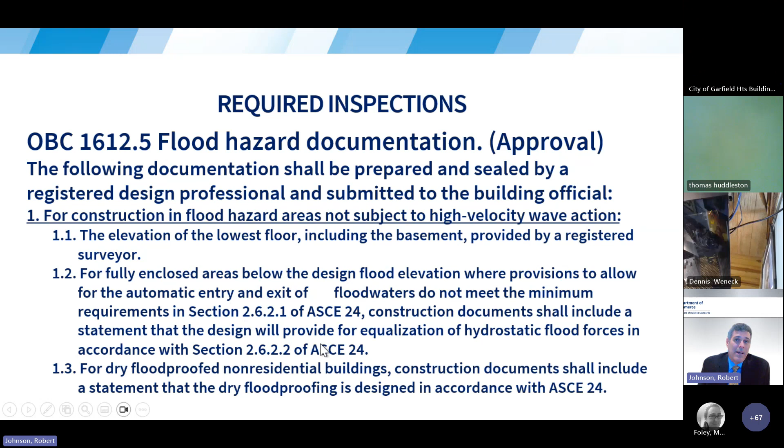Flood hazard documentation is required. That's in chapter 16. This is part of the approval. The following documentation is to be prepared and sealed by the registered design professional and submitted to the building official. So these following items here, all this is coming out of ASCE 24. All this stuff has to be documented. And then you're going to verify it when you're out in the field.

Frame inspection. So this basically says that before everything's covered up, it can be done after the roof deck or sheathing is put in. But basically, anything that has to do with the exposure of seeing the framing, you want to check that stuff without the removal of members. So you want to verify the removal of framing members for installation, access to the building service equipment systems. Did the contractor follow the manufacturer's installation instructions for repairing access to framing? This is always the biggest deal.

You have a wood frame building, say a house, and everything looks great. And then the plumber comes in and the electrical guys come in and they start drilling holes, and sometimes large holes. I've seen HVAC contractors put ductwork in through joists where the only thing left in the TJIs was the 2x4s on the top and the bottom. Everything in between was gone. So when you see those kind of situations, you have to call them out because those are violations. And then you have to tell the contractor that they should verify from the manufacturer's installation instructions of the framing how to correct when too much material has been removed from the member.

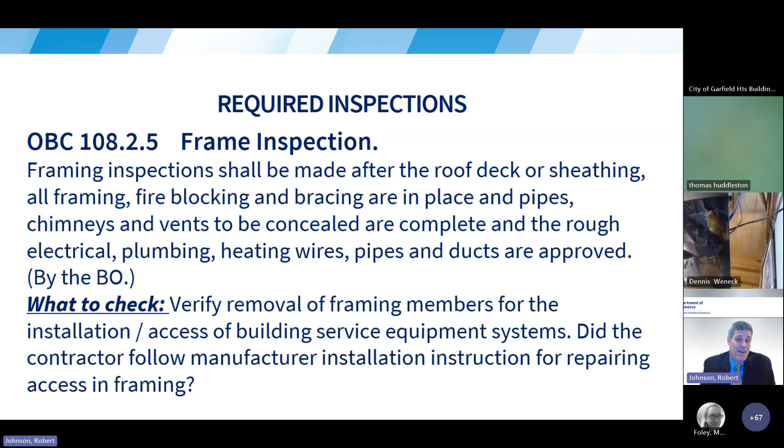So when you come back out to reinspect what they did to reinforce these members, or maybe take the HVAC ductwork out and put it in a different place where it worked without having to do that work, and then fixing those members, however they choose to do it, that's up to them. But you as the inspector have to verify that they have followed the manufacturer's install instructions on correcting those repairs.

Fire resistant penetrations. This is one of those safety issues. So where the protection of joints and penetrations in fire resistance rated assemblies...

Hey, Rob. Yes. I think Bruce had a question from the chat he wanted to bring forward.

Okay. Yeah, it seemed to be relevant since you were talking about what happens if someone takes out too much material. But we got a question where, in the scenario that a contractor finds suspect soil in the footer, excavates the footer to remove the suspect soil, and replaces it with crushed stone to proceed with approved plans, do they have to resubmit to the building official? Do they proceed? What should the inspector do in that scenario?

That's a really good question. I don't know exactly how everyone does it, to be honest. Usually that corrective measure is already in the soil engineer's report. They've done spot checks when they core drilled the soil to find out what the strata look like in the soil, and they have an idea basically what the site represents.

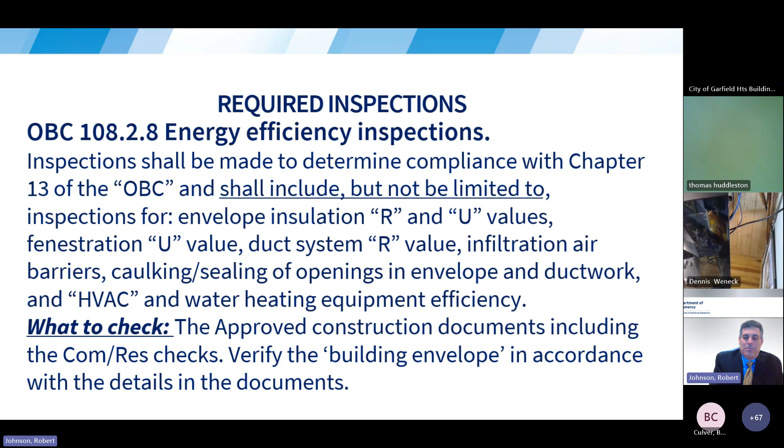Painter's caulk isn't a good idea to use in foundation penetration opening caulking. It's going to deteriorate. Same thing with HVAC. There's certain types of caulk that you use to seal up junctures and ductwork. So check the packaging as you're walking through.

Building service equipment inspections. They have to be installed in accordance with the approved plans and the equipment listings and the manufacturer's installation instructions. So the inspections include, but aren't limited to, systems and their associated components. So we're talking about mechanical, heating and ventilating systems, air conditioning systems, mechanical exhaust systems, plumbing systems, fire protection systems,

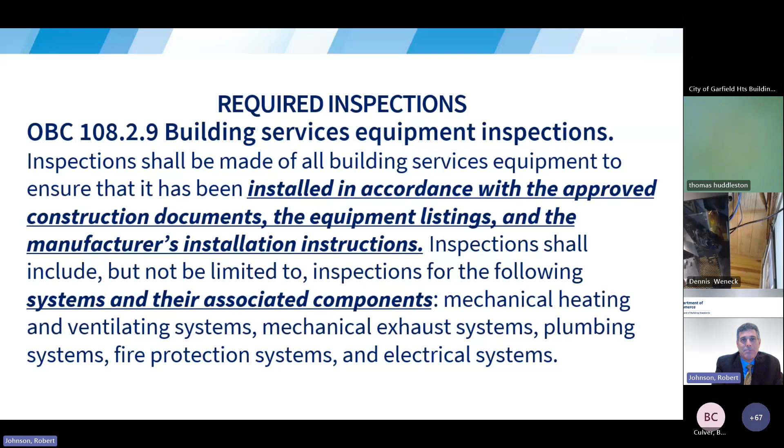and electrical systems. And what we're checking for, remember, I know that systems are complex, okay? But the approved documents must be relied upon in these verifications. Again, you may be looking at specifications and not just the drawings. So check the specifications for accuracy and sizing and the correct equipment, and ensure that it is consistent with the specifications for manufacturer listed by the design professional.

So, I'm trying to think of a good example here. An HVAC system, the units themselves. There may be 3 or 4 different manufacturers that are listed in the specifications. And the next section of that specification will indicate which type of system, meaning the listed labeled system, can be used on that project. So you want to make sure, first off, is Trane listed in the list? Did they provide some other manufacturer?

If they provided some other manufacturer, then the gold standard that they had as the basis of their specification, they have these other alternates. If one of the alternates got picked, we want to make sure that the unit that was the alternate was the one that was still listed in the specification. If it's a different unit, it may not be sized correctly. So we want to check that kind of stuff.

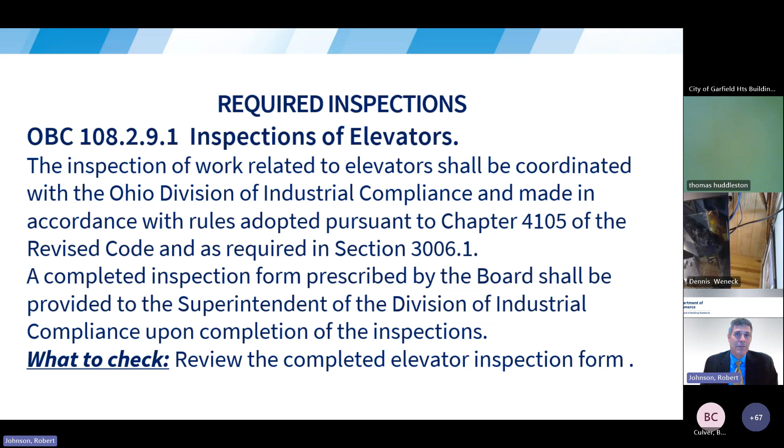job site. If there are things that they looked at as they're doing their review of the machine control room or anything else that's in their list, they're going to let you know with this list. And they and you will be coordinating together with the contractor to ensure that their list is completed and your list is completed when it comes to anything that's an outstanding violation for elevators.

For the most part, DIC is going to check everything anyway, and if they find something, they'll let you know that may be something that the building department will have to address. The main thing is the owner, their representative, has to correct all violations or non-compliance. Okay, boilers is the same situation.

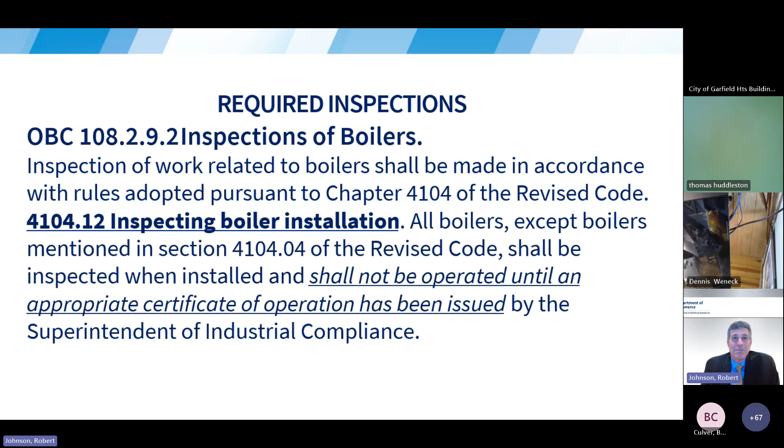With boilers, we just need to be aware that the thing should not be operating when you show up, unless a certificate of operation has been issued. And that's going to be by the superintendent of industrial compliance, meaning the building official of the Division of Industrial Compliance at the Department of Commerce. So something to keep in mind there.

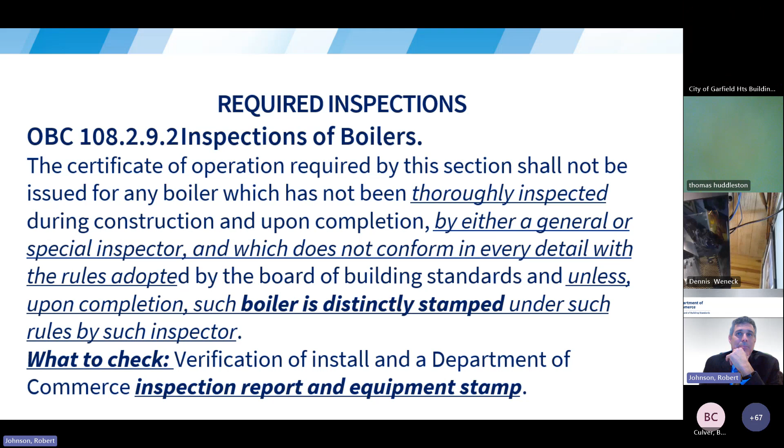I put this in here, it's in the code, but again, we're really relying on DIC to do these things, and we're just verifying that all of the records and equipment has been stamped and determined to be in compliance with DIC's review of this stuff and their inspections of it. But just be aware of that, especially when you get into large facilities such as hospitals that rely on water heat for a lot of the heating of the hospital.

Other inspections. Okay, so everything I just gave you are the required inspections. But there may be other inspections that the building official wants to institute. He has the authority and the right to do that. So if there are certain systems or certain types of materials that he just feels, hey, we should just be checking this anyway, I'm going to go ahead and create a required inspection for this. He can do that. And it would be a required inspection then in that jurisdiction, mind you. Other jurisdictions may choose to take a pass.

So what do we check? All right, here's a good example of this. The RCO does not require roofing inspection, but it's an important system. If the roof fails, everything underneath it will eventually fail. So most jurisdictions that I know of have now instituted a roof inspection under the RCO. This is one of those other inspections created by the building official, and it's now a requirement that those inspections be conducted.

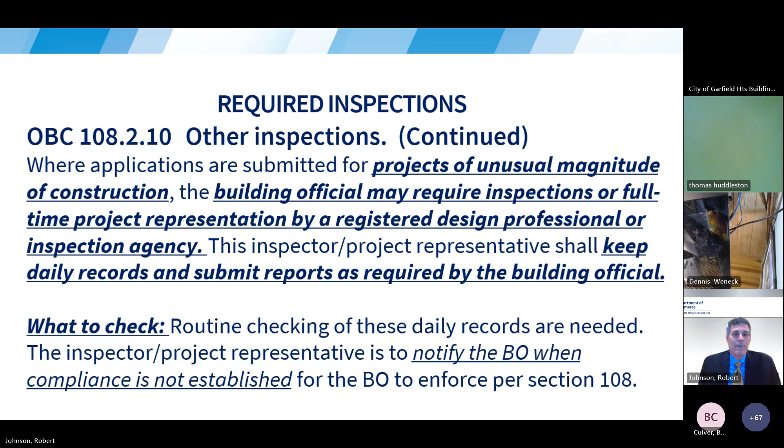Full-time inspection may be required for certain things. Installation of fire protection systems could be inspected rather by the fire protection designer. They are certified by the board, which kind of seems like putting the fox in the hen house because you designed it and then you inspect it. It doesn't seem unbiased to me.

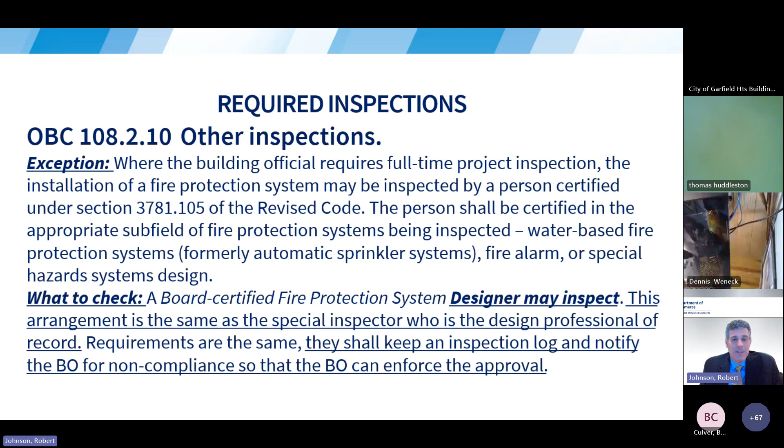But since they understand the system and they understand the standards, oftentimes the fire protection system designer can inspect their own work. So just be aware of that. You still need to keep a log. They still need to communicate to you at the building department when things have passed, meaning that they're in compliance with the approved documents.

Industrialized units. So Jay covers this program with the board. Basically, it's a mini building department within the Board of Building Standards for industrialized units only. Now remember, industrialized units are buildings that are constructed in a plant, and then they are shipped to a site and set on construction that you in the building department review and approve and inspect.

So when on-site work has been approved, if the industrialized unit is completed, it can be shipped and put onto this site. But that doesn't mean that they're done. The building inspector still has to go back out and check everything in terms of how it is set on the site built work. Okay. So there's some things that the inspector is looking for.

They're going to look for whether or not the unit has been damaged, maybe as a result of the transportation or improper protection and due to weather. And if there is damage, then the building official needs to be notified, and they have to tell the owner basically to have the damage repaired. And then the inspection of the unit has to be determined, and the first thing you're looking for is the insignia or the sticker from the Board of Building Standards that says that this unit has been approved. It has to be on the unit.

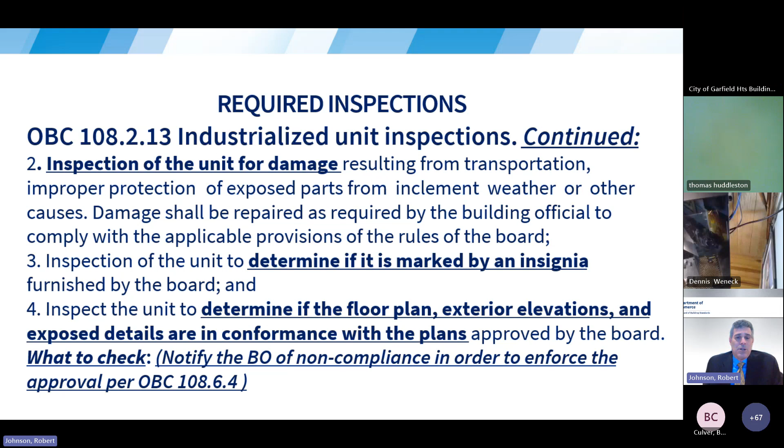If there is anything that has happened like that, you need to notify us at the board so that they can get the unit reapproved, but the manufacturer is resubmitting the documents for reapproval. Okay, so I guess the last thing is that when you find that the unit is contrary to the plans, report it to the building official. The building official will notify the board, and we will then take over to figure out how to get the corrective action.

But the building official must wait for verification of board corrective measures before issuing the certificate of occupancy for the install. Okay, remember, once it's been delivered, the building official technically has jurisdiction over its installation and eventual C of O of the building. The insignia that is on the unit is not a C of O.

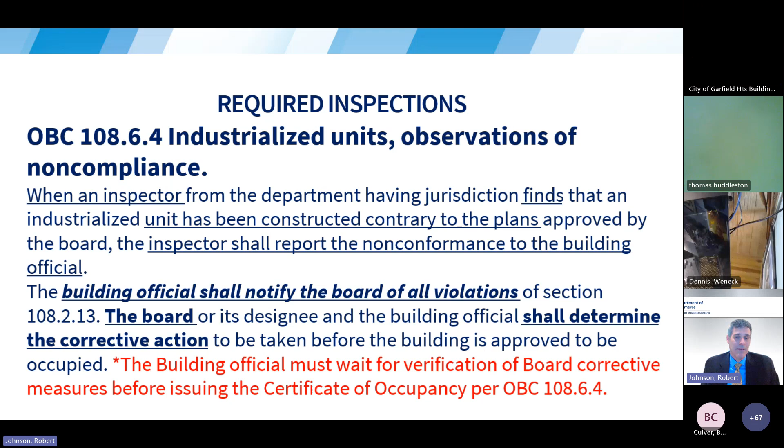Okay, it is just the board's recognition that they have an approved design and that this building portion has been stamped or sealed with the board's insignia per the approval that was for just the manufactured unit. Okay. So I wanted to point that out as clarification because that's not always clear to folks.

Okay, the posting of occupant and structural loads.

These have to be verified. In chapter 16, it says that there has to be basically a durable sign that indicates occupant loads and structural loads of buildings. So you have a hospital, you have a medical records storage area on the 6th floor of the building, and it's going to have probably somewhere between 200 and 250 pounds per square foot on the floor. That's its live load. In order for that to be in the building in that way, it had to have been approved and it had to have met all the structural requirements to support those loads.

What we don't want to do is ever take the sign down and move that space to some other space in the hospital, because the loading wouldn't be supported with the type of structure that was put in the other part of the hospital. So that's why we put these signs in. We want to restrict how many people could be in a room, such as an assembly space. That's why we have a posting of the occupant loads for safe exiting under an emergency situation. And where there are structural loads that have to be abided to, if it exceeds 50 pounds per square foot, then it has to have a durable sign.

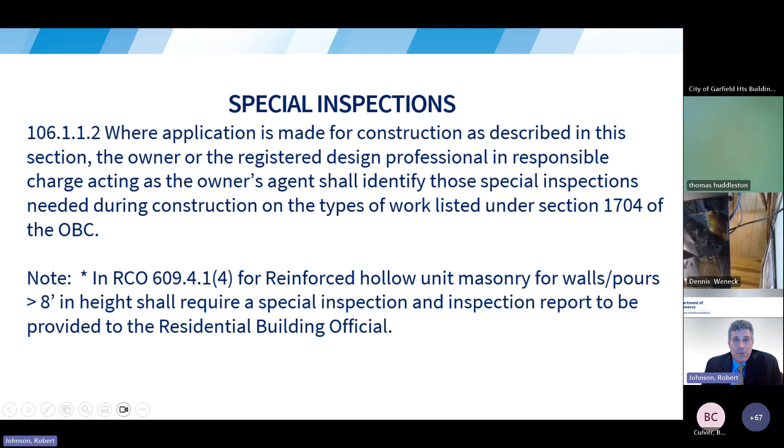Okay, inspection agencies. These are agencies that are approved through us, the Board of Building Standards, as a conformity assessment body. So a special inspection agency, if they're employed, the building official needs to be aware of that. They need to check the board's website and make sure that they are on our list, and the building official approves them for use. And then the building official will receive reports from that agency for any time there's non-compliance.

Okay, acceptance, performance, and operational testing. So there are systems out there in buildings that when they're fabricated, when they're installed, the certified building inspector and building official need to be in the presence of the tests that are being done so as to verify that they are in compliance. Oftentimes, these tests are conducted based on either applicable codes in the building code or testing, performance and acceptance criteria found in the reference standard.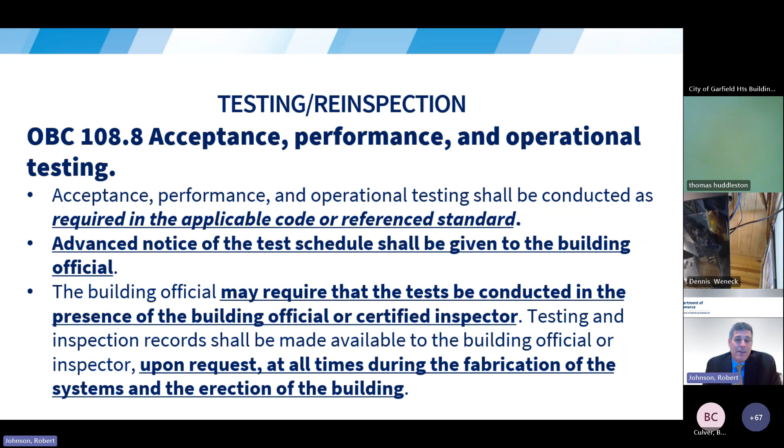So the building department needs to be notified by the contractor through advance notice so that you guys can be there to witness the testing, okay? So there is some coordination that has to occur between the contractor and the building department. There is, in section 108.8, a contractor test completion certification that needs to be done for the plumbing systems. Maybe you didn't know that.

If you are working with a Department of Health that's enforcing plumbing in your jurisdiction, they are required to receive these certifications, and they are required to notify the building department that these systems have been certified. The building official needs to know. This may not be being done in your jurisdiction because oftentimes health districts just kind of do it their way. But you as the building official and as the plan or building inspectors need to be aware that these things need to be done.

If you're enforcing plumbing in your building department, you should be making sure that these certifications are being given to you so that you know that the systems do not leak, that they are operational, that they are performing as they have been approved.

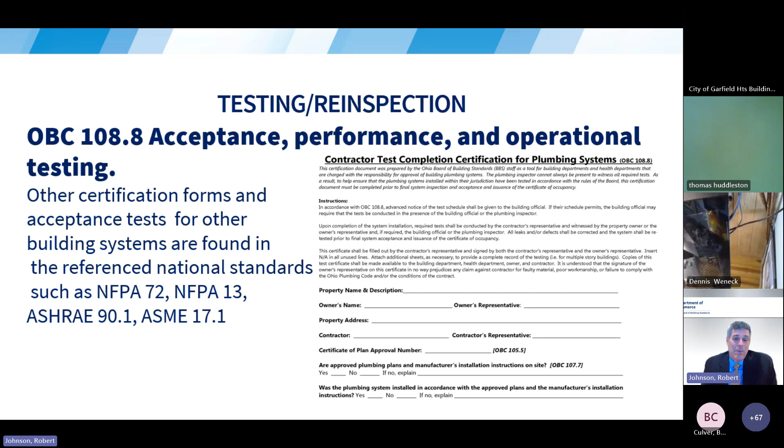Also, fire protection systems. It requires acceptance testing as well. Doesn't matter if it's new, altered, extended, or repaired. It is designed to be done every time there's something done to that system. So an acceptance test has to be done. And the whole purpose of it is to make sure there's no leaks and no defects in the system. So you'll be there to witness the test, and the acceptance testing is completed, and that there's been notification to you that the system is good to go.

Apparatus, material, and labor for tests. The owner is responsible for paying for all this and to arrange it. So this is not something that you have to manage in that way. But when the testing is being done, you may not necessarily be required to witness these kind of tests. But the contractor is required to certify that these systems are per the reference standards, because there are forms in the back of these reference standards that they are supposed to fill out a copy of, and they should give it to the building department. So you may review these forms at your request.

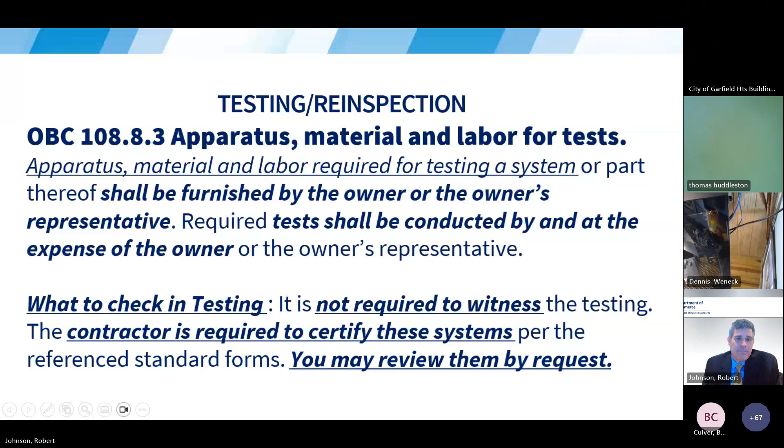Reinspection and testing. All right, so I already hinted at this earlier in the first session, but where work or installation does not pass an initial test or inspection, the inspector shall proceed as outlined in 108.6. And when these systems are not passing performance tests or undergo some modifications of the systems to pass, an inspection is required. Okay. So I've been on jobs where the contractor repeatedly did not get the installation right on something, and it kept having to be fixed in the field and re-inspected.

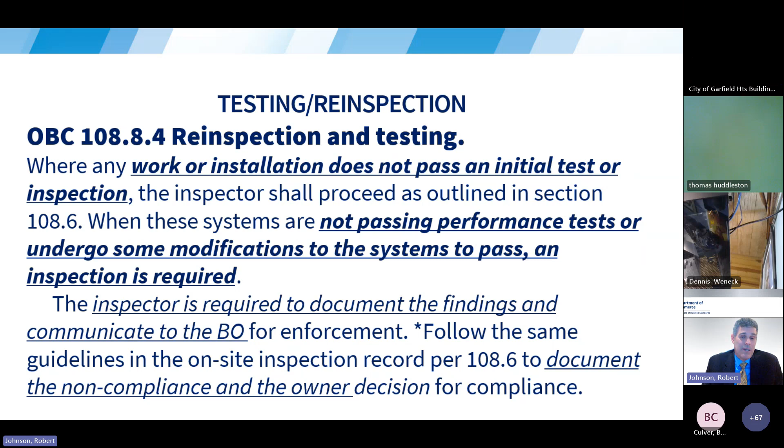The re-inspection is necessary. We want to make sure that it is followed through and that the installation meets the approved construction documents. If it does not do that, then that information has to be communicated to the owner through the on-site inspection record and to the building official, because the building official at some point may have to step in and issue an adjudication order, basically mandating that everything is in accordance with the approval. All right, remember, as I said, there's no such thing as a final inspection except for fire protection systems. It's the only place that it's listed.

A purpose of inspections in general, okay, is to complete verification that all outstanding items that were in violation have been corrected. So you have your initial inspection, and if necessary, any re-inspections. If an inspection is compliant and passes, then it's just done. It just means that the system is completed. We don't need to have a final to say, well, we're just going to check one more time just to make sure, right? So keep in mind that successive inspections may be required to complete required inspections.

Fire protection system final inspections. Okay, so I mentioned this already. It has to be coordinated also with the fire official. So we're not just going to send out a building inspector to look at this. It's going to be also witnessed by the fire official, because remember, the building goes from our jurisdiction to the fire official's jurisdiction after the C of O. So it's always a good idea to work with your fire official to help you out with doing fire protection system review of documents. That helps the plan examiner, because the plan examiner still has to look at it anyway, and look at the notes between them and the fire official before approval is given for the system.

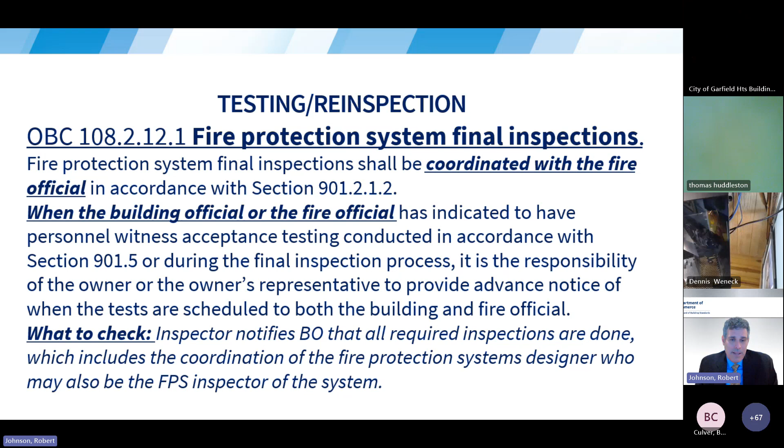But I want you to be aware of that, because sometimes fire can be pushy and demand things, and they have to understand that they're not the AHJ yet. They're just there to tag along to see the coordination of and the certification of fire protection systems. So hopefully that is helpful to you as you're reviewing those type of things.

Okay, inspection completions. Again, when successive inspections have been done, meaning re-inspections, once those are done and they now comply with the approved documents, the building official reviews the findings, which should be typical, and shall issue the certificate of occupancy. So this is when all inspections have been done on the building. The C of O is ready to be issued. Okay.

Let's see. One thing I want to note is that when buildings are under phase approvals, those successive inspections in the phases are actually just part of the bigger picture, right? So we got to be careful that if a building, I hate to use the term, but a shell building, right? It's not going to be occupied right away. It's put up and it's ready for somebody to rent it.

You're not going to get a C of O for the spaces. You may get a C of O for the whole building, but it's going to be general in nature. It's not until an approval request comes in for the space and how it's going to be used that a C of O will be issued for that space.

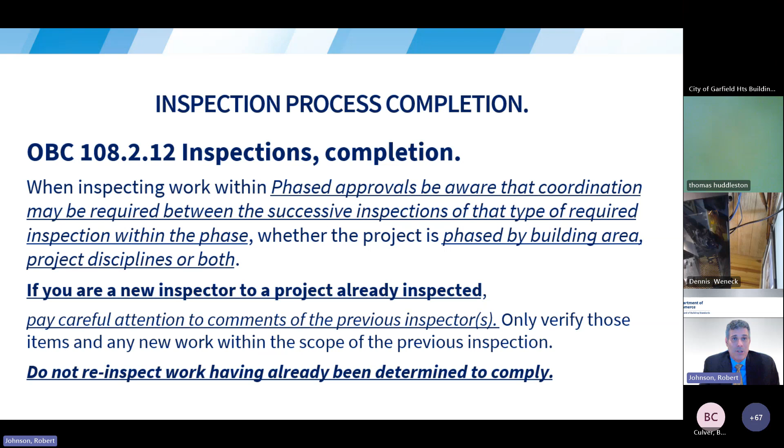Because if they've changed the work, that means they've changed the license to build, which means that the contractor, the designer, the owner need to resubmit documents to have that condition approved if it's approvable. If it can't be approved because it's still in violation, then of course the contractor has to correct it to make it match the approved documents, or the building official will issue an adjudication order so that the owner can appeal to maybe get a variance or something else.

Okay, so just a reminder, a lot of you folks that are inspectors have come out of the trades. That's great because you know how this stuff generally is built, and we don't want to discourage that. But I want to caution you that when you're doing inspections, you are not performing a contractor's punch list. This is not about getting the work done. This is about verifying that what's been built is in compliance with the approval.

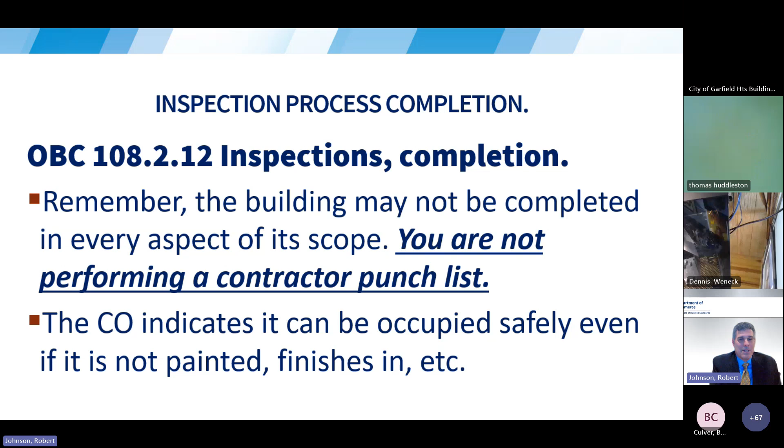Okay, so can a building be occupied and not be completely finished? Yes, it can. Think about it. Painting, finishes, trim on the floorboard, stuff like that. Can the building be occupied without those things? Yes. So we're not really trying to punch list the building. That's why we really don't have a final inspection. Because what's final? Well, to the building code, it's those systems, those materials, those things that basically represent risk that have to be done correctly so as not to be a risk to the occupants.

Okay, the actual certificate of occupancy. That form, we've already talked about it. Please use our version of it, or you can amend it to make it look different on the piece of paper. But make sure that all those items in the C of O show up, okay?

All right, I'm starting to run out of time. When things go differently than expected when you're doing your inspections, there are three conditions. The first one is work is contrary to the approved documents, right? We hope that when we go do an inspection, that every single time they're going to get it right. And it's just, that was easy, check. They're done, you can proceed with the work. But when it's contrary, and we know this already, you have to tell them that it's not in compliance, and refer them to item 4.

If they say we're not going to revise it in the field to match, and we're not going to revise the drawings to change the condition to make it approvable, then they are asking for an adjudication order. So that's condition 1, okay? How do we get them in compliance? At this point, if they say they're not going to do anything, the building official has to issue an order.

The second condition is observation of violations not shown in the plans. That's that nobody's perfect approach, okay? So if the inspector looks at the work and looks at the construction documents and he sees that there is a code violation, okay, this is based on his knowledge of the code. He observed something that he knows is a code violation, but it was approved that way. He should at least document it and go back to the building official and tell the building official, hey, I walked the job. I noticed that this condition exists. It appears that the designer designed it this way, and it appears that we approved it this way. But this appears to be a code violation.

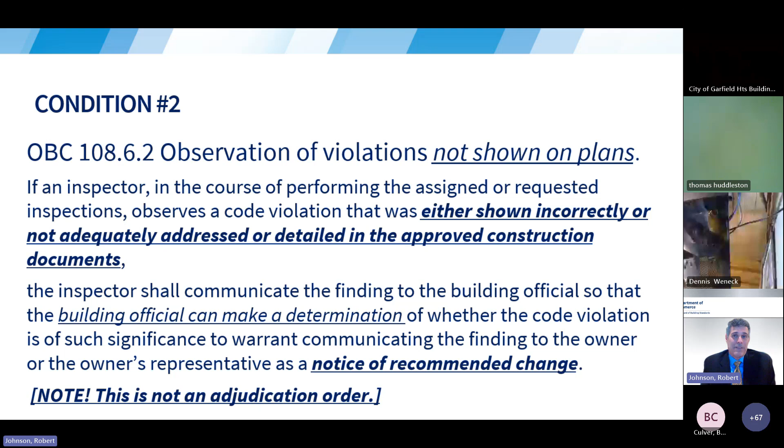The building official will then sit down with that information in the record with the plan examiner, make a determination. If it is a code violation that he believes should be communicated to the owner, then he sends it to the owner as a notice of recommended change. A notice of recommended change is an actual form. It looks a lot like the adjudication order, but the adjudication order is saying you have to do something based on this code section. And this one says, well, we approved it this way, but it is a code violation, and we're letting you know. But it is not a serious hazard, so you have to decide if you want to keep it or do you want to make it code compliant. So it's kind of a catch of a mistake.

This is what our form looks like. And you'll notice when you read through, and I recommend that you download this from the board's website, actually read this form. It basically says, we observed a code violation. It was approved. However, it's still a code violation. We recommend that you abate this condition in order to be in compliance with the building code.

Now the owner gets to make a decision. They can either agree with the building official and have it fixed, which could represent a lot of money, or they can live with it because no harm is done. No one's going to get hurt. So the bottom line is this: the owner gets to decide. We don't tell them what to do. The decision is theirs. Once they make it, it is final. You, the building official, and the building inspector, but especially the building official, need to document this transaction in the C of O under stipulations, variances, conditions. Okay? Has to be done.

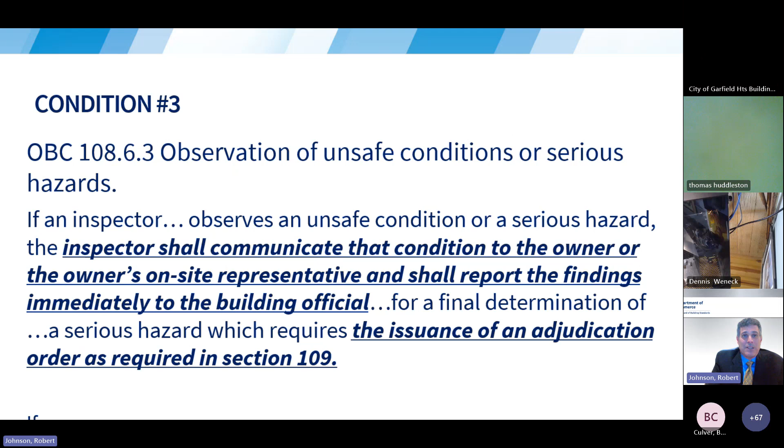Okay, unsafe conditions. This is serious hazards. Okay? When you find them, the inspector has a responsibility to communicate to the owner, especially if they're on site, and report these findings to the building official. The building official needs to issue an adjudication order to the owner to abate the condition.

What's a serious hazard? A serious hazard is a hazard, a condition of considerable consequence to safety or health, which has been established through experience to be of certain or probable consequence. In other words, if someone interacts with this condition, they will either be injured or killed.

Usually we're looking at things that fall under this category as electrical safety hazards and structural safety hazards. Those are usually the top two, okay? So we want to be sure that, inspector, if you notice something like this out on the job site, you should immediately tell everyone in the area of that condition to leave. It may even mean leaving the building, okay, for safety purposes. Now, it's up to them to decide what they're going to do, right? Honestly, I would leave, because we don't want someone getting hurt or dying, okay?

Here's an example of one of these. This actually happened in Columbus. Someone was probably high or drunk or something and ran a car into the side of all the supports of an apartment building, a 2-story building. And it created a lot of damage to basically the second floor walkway that went to 4 units of apartments. It did such damage to the landing at the top of the stair that no one could walk across it.

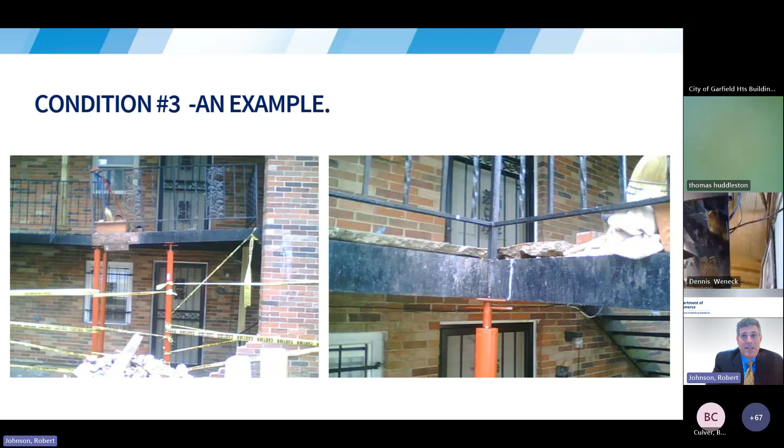So the building department stepped in, declared this a serious hazard, and caused the people on the second floor to vacate and the people below, because if there is a collapse and someone's coming out of the lower level door, they could be hurt or killed. So that's why this is important. It's important to understand what a serious hazard is and when to call them, okay? Always work with the building official. This is a legal process. They have to issue that.

Okay, we're basically done. I just want to, in the last minute here, let you know that there are some resources out there. Half of them are out of date and half of them are under redevelopment. Since we have a brand new building code, we're beginning to work on the Chapter 1 commentary. I actually started looking at that just a few days ago, and we'll have to update the building department resource packet for the 2024 as well. Probably not a lot of changes will occur, so I think you can still refer to the 2017 OBC commentary if you have a question. And you can always look at the 2024 and compare. But any changes or differences, we will fix so that we can have a new Chapter 1 commentary out in the near future.

Other really helpful things, which are out of date, unfortunately, and I checked ICC's website last night and I haven't seen any updates yet, are these things called ICC residential inspector guides. They are very helpful. They're exhaustive, but I like reading them because it helps me understand the things that an inspector will be looking for when they're walking the site for any given required inspection. I think it's really good reading for getting familiar with all the little things you might need to check on a particular type of inspection. So I recommend you look at those. If you have access to them in your building department, just grab one and read through it every once in a while on your lunch break.